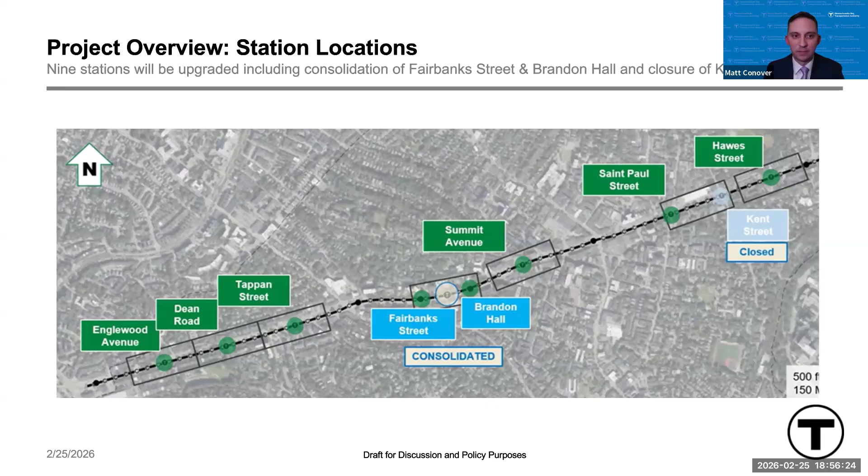For those familiar with the 9 stations, these challenges will be very familiar, but there is a safety and traffic risk. Stations like St. Paul lack physical barriers, forcing people to stand on the curb and into the path of automotive traffic. There's a severe lack of space.

Platforms are narrow; stops like Tappan cannot accommodate strollers or mobility scooters, and they create pinch points and safety hazards. There are accessibility barriers too—steep slopes and uneven surfaces make boarding treacherous, especially in ice and rain, and it's impossible for wheelchairs and walkers to navigate those slopes on the platforms. There are also obstructions: trees and poles block the paths and create physical conflicts with the new Type 10 trains.

There's a lack of wayfinding—poor signage makes it difficult for those on board the train to see what station they're at. There's also a lack of lighting; the stations we're talking about today are only lit by the existing street lights along Beacon Street. Our team has heard from numerous individuals who cannot access the Green Line from stations in front of their own homes due to some of these challenges.

At the completion of this project, the entire C branch will be accessible, and those issues I just talked about will be addressed. Through station consolidation, closures, and platform relocations to ensure accessibility, the MBTA expects to see a 3 to 7% decrease in travel times.

The project will improve wayfinding and add lighting for customers. We've set aside dedicated funding for tree replanting, which will be done under the guidance of the town arborist and result in tree lawns along the Beacon Street corridor.

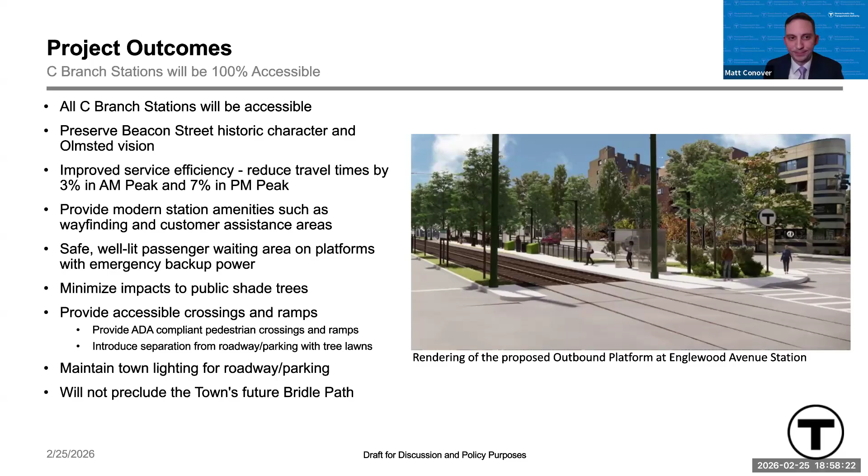This project is a result of several years of collaboration between the MBTA and the town. Through numerous engagement efforts with town residents, elected officials, and stakeholders, we've developed a final plan that provides significant improvements while minimizing negative impacts. The project will ensure a Green Line that is accessible for all and leaves a lasting improvement along the Beacon Street corridor. Now I'll turn it to Gwen Dunlevy, who will provide specific details on each of the stations.

Thank you, Matt. As Matt said, my name is Gwen Dunlevy. I'm the Deputy Chief of Integrated Transit Programs, overseeing the Green Line Transformation Group, which manages a holistic set of projects aimed at modernizing the Green Line, including this one.

I'm sure I'm familiar to some of you. I've been delivering projects along the Green Line, including in Brookline, for the past 6 years for the MBTA, and have presented a number of times about this project, including to this board, over the past few months.

As many of you already know, in order to provide the safe, accessible platforms this community deserves, there will be impacts to the existing infrastructure. We've been hard at work over the past year with the town to minimize these impacts, but some are unavoidable, which we will go over in detail today.

Before we dive into those details, there's a couple of points I'd like to make. First, none of the station upgrades we'll be discussing today result in the removal of any existing pedestrian crossings. Some will be shifted slightly, many will be upgraded, and a few new crossings of the track will be added, but we're not closing any.

The second point is that we won't be removing any accessible parking spaces. Some will shift location a little bit, but there's no change in the quantity at any station. There will be impacts to some parking areas and spaces, but none of those remove any accessible spaces.

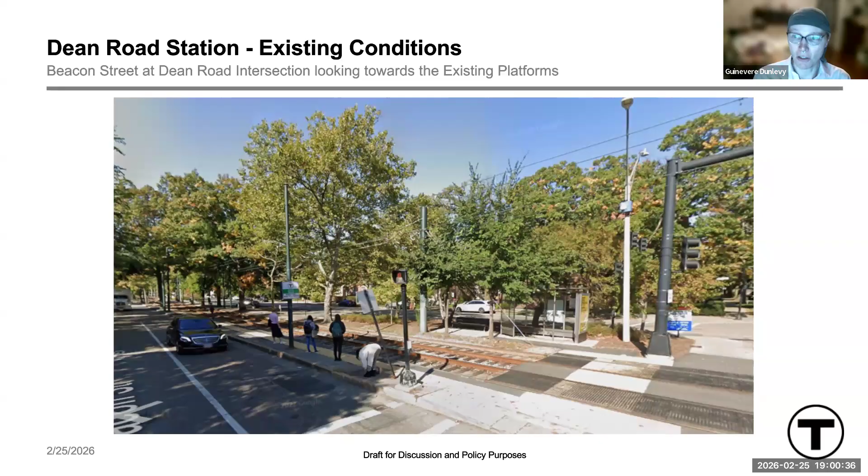Jumping into Dean Road, our first station to look at today, we have a picture of existing conditions. This highlights a lot of the things that Matt mentioned. You can see passengers here and a very thin strip of asphalt between the yellow line—indicating you're too close to the train—and the traffic just a couple feet behind them. Obstructions, narrow platforms, all those things Matt talked about make it hard to utilize the T, and impossible if you have accessibility needs.

Before we review the future layout of Dean Road, I'd like to discuss how we choose platform positions. Impacts to trees, parking, travel lanes, and the efficiency of travel are all factors that we consider and worked hard to reduce with the town. But at its core, this project is an accessibility project.

One of the primary parts of making an accessible station is having accessible paths of travel to reach and utilize that station. A big part of this is related to the slope of those paths. There are maximum slopes as part of ADA requirements, and in some locations, including at Dean Road, the location we can place the platform is controlled by the slopes in that area.

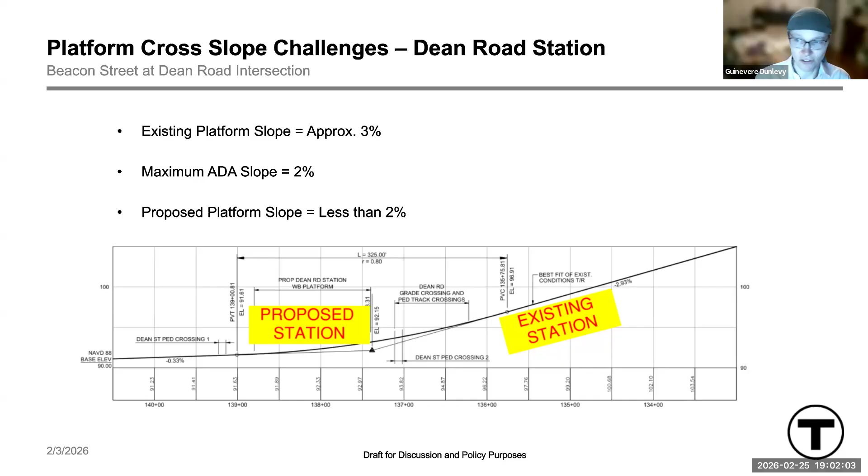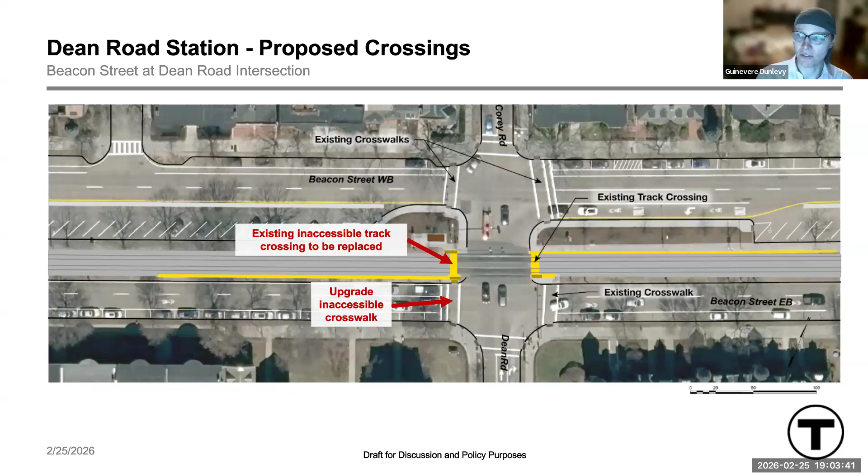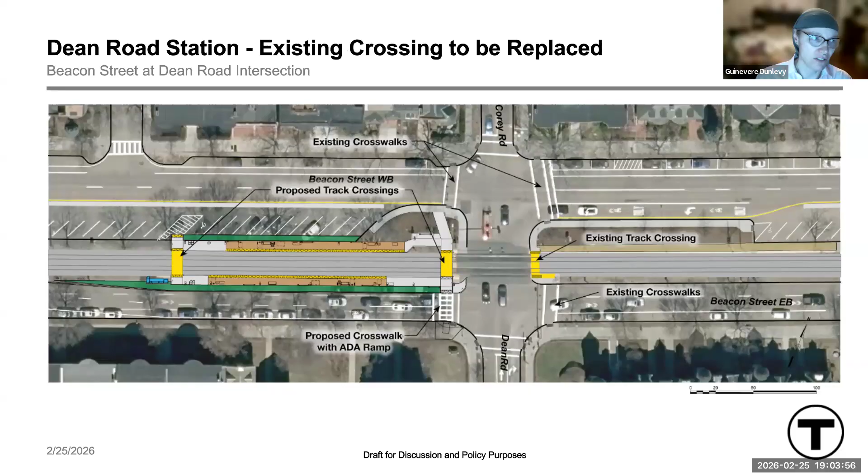Next, we can look at our proposed crossings. Here we show the crossings that exist today and highlight the crossings that will be upgraded as part of this project. Those are the ones to the west of Dean Road, including the pedestrian crossing on Beacon Street eastbound. In our final condition, those will be upgraded, as well as an additional track crossing added to the west end of the new platform. All existing crossings will be maintained.

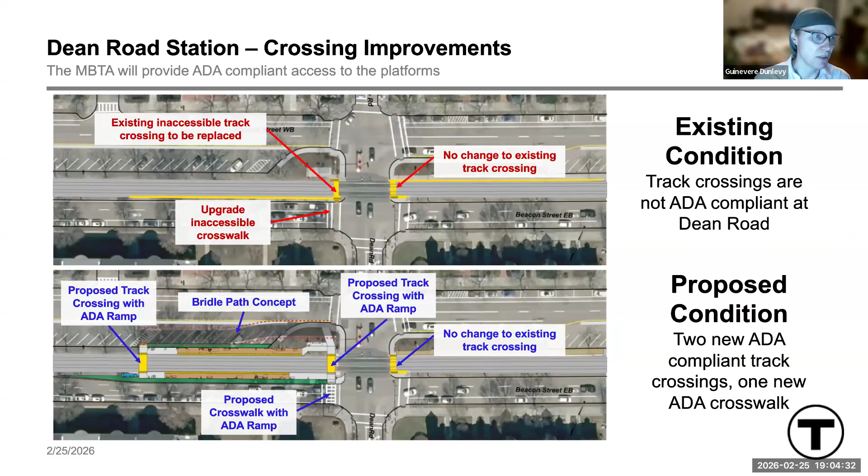Again, highlighting the before and after, the two existing track crossings and all pedestrian crossings are maintained the same, but the crossings that enter the new platform or cross the tracks at the new platform are upgraded. We also show the future bridle path. This project is not working on the bridle path, but we want to demonstrate, as this was a big part of our coordination, that we're being careful not to install any new infrastructure that will be in the future path of the bridle path. We don't want to preclude the building of that by building things in the way that would have to be moved in the next few years when that project moves forward.

Our next station is Fairbanks Brandon Hall Consolidated Station.

Here we have our existing conditions. This location is a bit different than many of the others. We don't have the issue of it being right up against traffic, but we have a steep wooded slope just to the north side of the tracks. Platforms are very similar to all the rest, with that thin strip of asphalt, with the obstructions, the slopes, and the poor lighting that we have at many other stations. This is another station that similarly needs all those same upgrades.

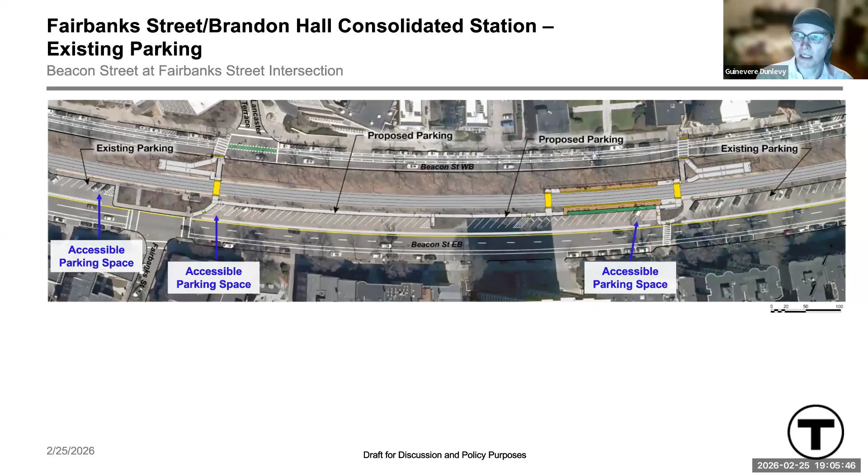Looking at our top-down view of the existing condition, we show a couple of spaces that will be removed for safe means of egress from the platforms, and highlight where those accessible parking spaces are. Moving to the future condition, we can highlight that those accessible spaces are staying the same, and the angled parking spaces will be respaced and end up a little differently.

Now, again, this is a little misleading. Our previous slide showed we're removing two spaces for those safe means of exit from the platforms and the walkway. But reconfiguring the spaces, spacing them out evenly, actually leads to 2 additional parking spaces than what are there today. So you end up with more parking spaces when we're done than we were when we started.

The team worked diligently with the town to explore many different locations and configurations for these ramps, dozens of different configurations to the left of the stairs, to the right of the stairs, up top of the slope, to the bottom of the slope. Slope walkways versus ramps, different foundation types. There was a lot of work and a lot of different options explored here to try to find ones that would minimize the impacts to the slope.

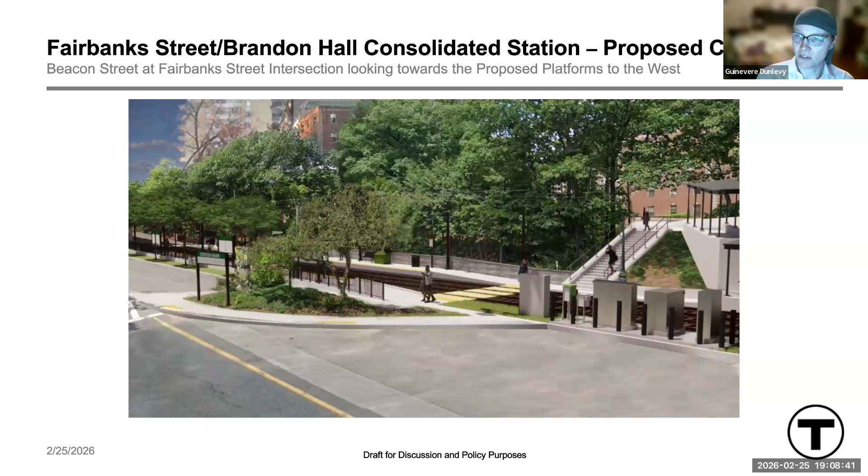Here we have a rendering of the future Fairbanks Brandon Hall Consolidated Station, showing some of the amenities. You can see in the right corner the ramp down that will be installed, the fence at the back of the platform, new signage, benches, trash cans, lighting, arrival signs — all of the great new items that we'll be putting at these stations.

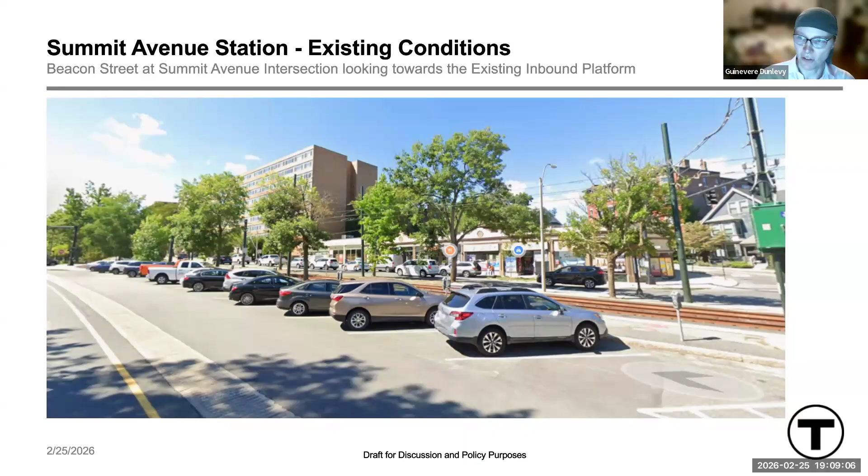Our next station we're going to discuss is Summit. This is very similar to a lot of the other stations along this corridor, with narrow platforms, obstructions, missing lighting, mostly relying on city street lighting to light the platforms, as we see at these other stations. Looking at the existing conditions, we highlight the 1 accessible parking space in this area and the existing angled parking, as well as the current platform locations.

They are significantly longer than they need to be for the trains that we run, so we will be updating that as well. In the final condition, we will be maintaining that accessible parking space. We aren't removing any parking here. When we get to the next slide, we'll show that we're actually adding a parking space here as well. And we are locating the platform just west of Summit Ave, between Summit and Marion Street.

This is a design that we've worked with the town to create to limit both the impacts to parking, meaning there are no impacts here, but also to the travel lanes. This is a busy intersection and a busy area, so we don't want to impact any of these lanes or prevent their use.

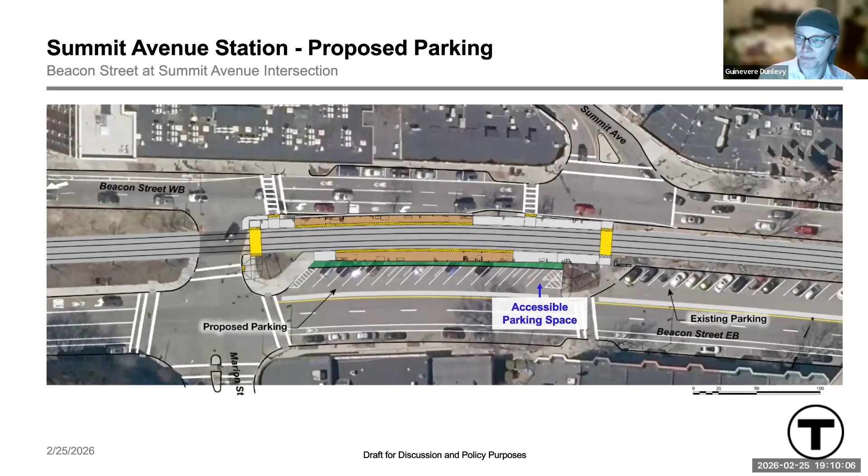Looking at the before and after for parking, we highlight that the accessible parking space will stay in the same area, but due to some shifts in the existing parking spaces — realigning them — they shift out a little bit to make room for the widened platform and tree lawn. This does net enough space to fit 1 more parking space than is currently there.

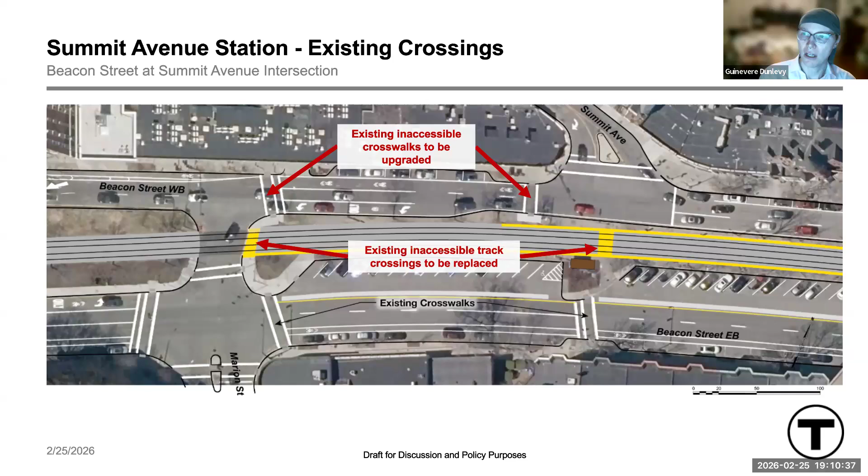Looking at our crossings, we have 4 inaccessible crossings that we're highlighting here: 2 track crossings and 2 crossings on Beacon Street westbound. All 4 of these will be upgraded with this project. No new crossings, no crossings coming away, but these 4 will be upgraded through the work we're going to be doing here.

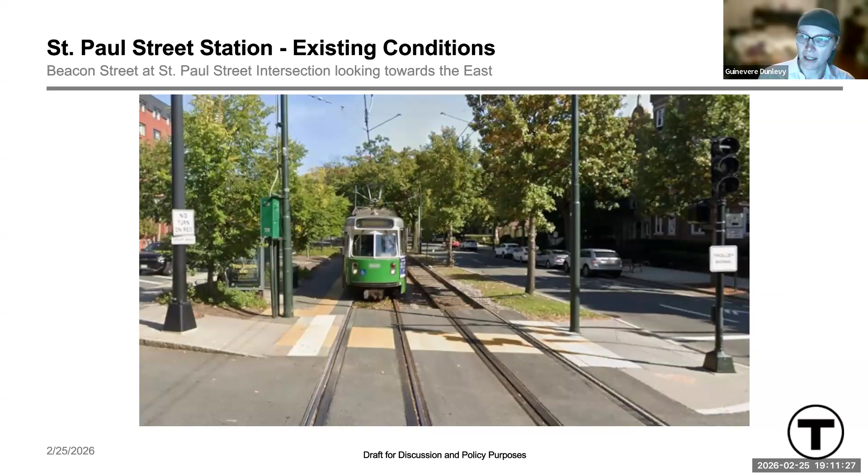Our next station that we're going to look into is St. Paul. Here we have a view looking east. We can show the outbound platform on the left, that same narrow platform with obstructions in the way and uneven surfaces that we see at all of these platforms.

As I mentioned earlier, this is one of the locations constrained by the slopes in the area, the opposite of what we talked about before. Here, the slope to the west is greater than to the east, so both platforms must be moved east of St. Paul Street to get those accessible slopes.

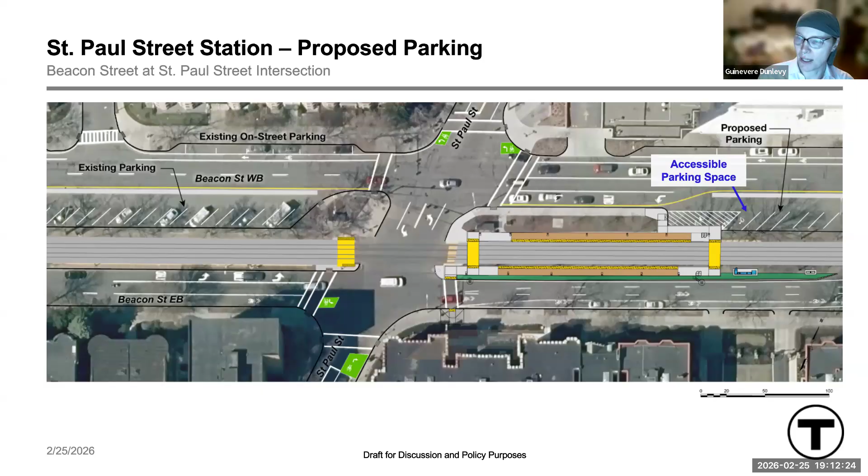Here we have the final condition with the accessible parking space shifted and the travel lane shifted into the parking lane to allow us to maintain those two travel lanes.

Looking at the before and after in this location, a total of 4 angled parking spaces will be removed with this shift, as well as 7 parallel on-street parking spaces that need to be removed to make room for that wider platform.

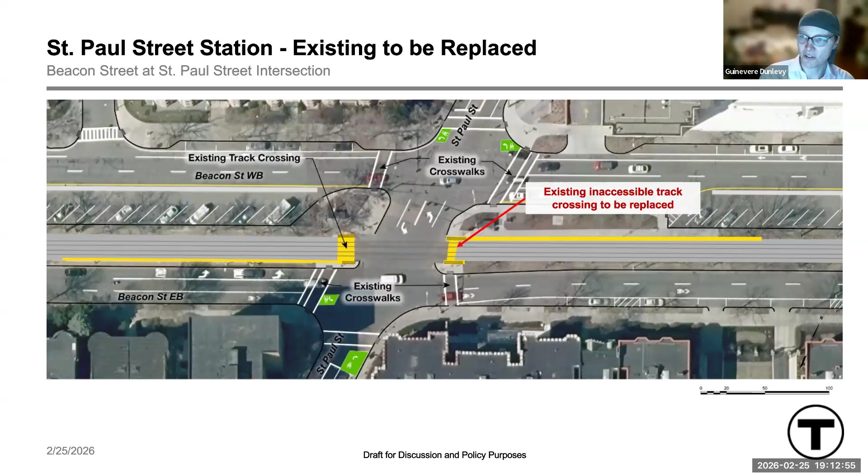Moving on to the existing crossings, we have an existing inaccessible crossing that is going to be upgraded, with existing crosswalks highlighted here at the track crossings. With this new station, there will be 2 track crossings upgraded, an existing crosswalk that will be upgraded, and an additional track crossing to the far east of the new platform location, giving us those 2 means of egress from the platforms.

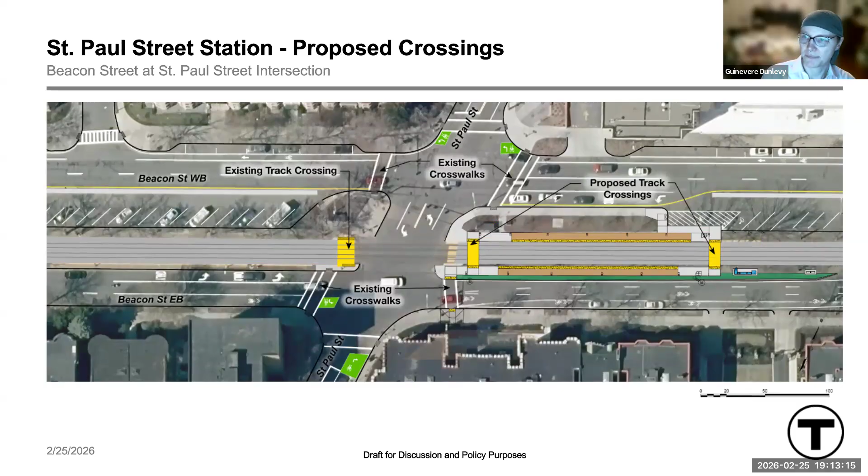Looking at our before and after, we show that we will be maintaining the existing track crossing west of St. Paul Street as a way to cross the street, but that will no longer be used to access either of the platforms. The platforms will be accessed on the east of St. Paul Street, where both are located, with an upgraded accessible crossing and a new track crossing.

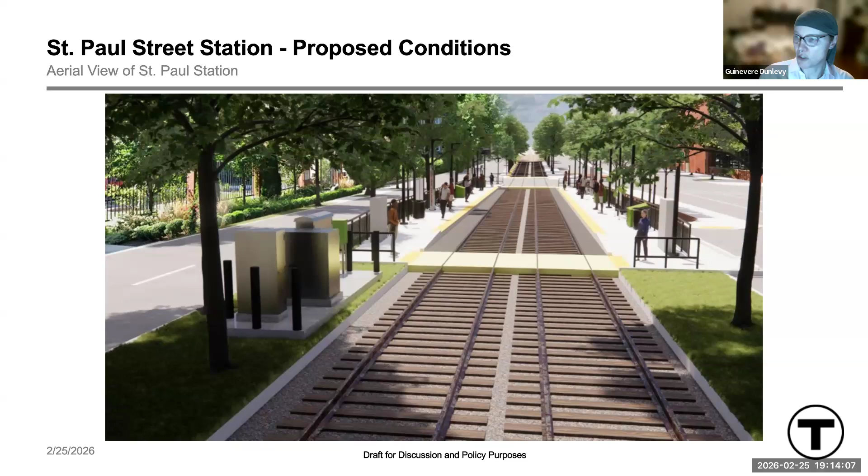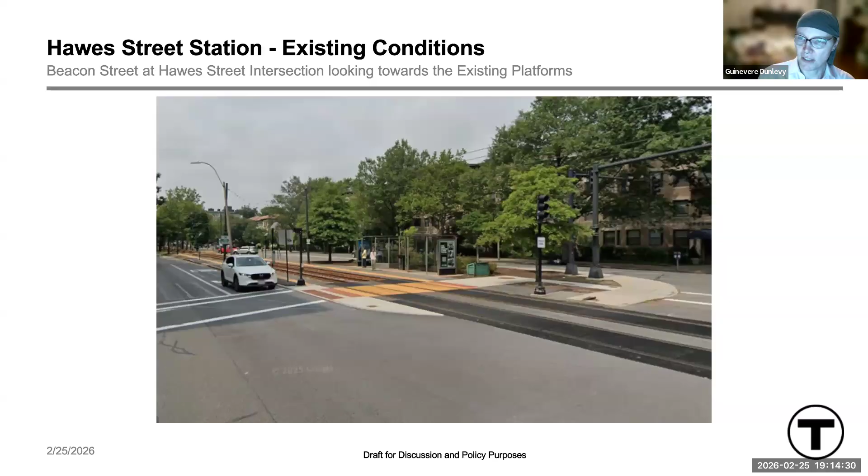Now here we have a situation mentioned earlier, that U-turn lane. For any of these platforms to become accessible, they need to become wider. An accessible path and accessible platform require more than what's currently there, which is only a couple feet wide, not enough to make an accessible path of travel.

Widening that requires us, in most of these locations, to take a lane. Usually we do that with one of the parking lanes, as that is often easier to give up than a travel lane. But here there is no parking lane, just 3 travel lanes. So to make the extra width needed for that accessible path and platform, the leftmost lane, currently the U-turn lane, needs to be removed.

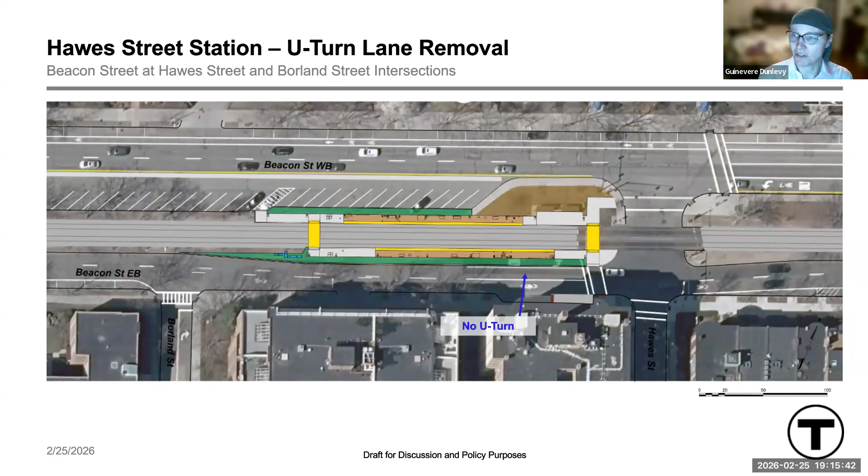Here is a depiction of the future platform. The layout is very similar to today, just with wider accessible walkways and platforms. Once we remove one of those lanes, about half will go to platform or walkway width. The other half, instead of repaving it with no specific use, the town has asked us to install a tree lawn there to use up the remaining few feet that would typically be part of that lane.

Looking at the other option that was originally explored for this location: moving the platform east of Hawes Street. This had some significant impacts that the town asked us to look at alternatives, which is what led to the design that we have moved forward.

One of our older designs originally proposed for this project preliminarily involved putting that platform east of Hawes Street. This had some pretty significant impacts, including 8 on-street parking spaces that, from talking to the town, had over roughly 90% utilization during peak times, as well as a heritage oak tree, 31-inch diameter, making it one of the largest trees that would have been impacted by this project.

Working with the town at their request, we progressed that alternate design, which is the one we have been working with, that has both platforms west of Hawes Street like it is today, to mitigate those impacts.

Now, with the removal of that U-turn, there are some options we worked with the town to look at. These two are available if you've already reached Hawes Street when you realize you need to take a U-turn. One is to take a right on Carlton and circle around through Monmouth and Hawes. Another is to go down to Park Drive, a few blocks down, and make a U-turn there.

Two other possible options for people driving down this corridor trying to make a U-turn would be to take a left on St. Paul Street or a right onto Kent Street to circle around to Hawes. All of these options are less than a half mile detour, and depending on traffic, at least at low traffic times, would only add about 1 to 3 minutes to travel time.

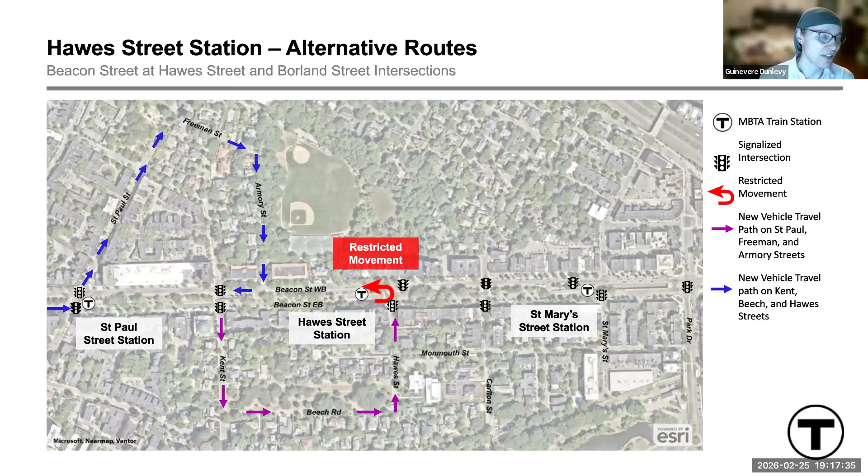Using these as different metrics that we've explored with the town for determining the best place to locate this platform: the measured low turning counts—this is actually the lowest turning count intersection along Beacon Street, less than 50 cars an hour at peak—the need to retain those parking spaces, the desire to reduce impacts to trees, specifically that very old heritage oak, and the available alternate circulation methods, led the town to ask us to explore and move forward with the design to where we are today, keeping both platforms west of Hawes Street.

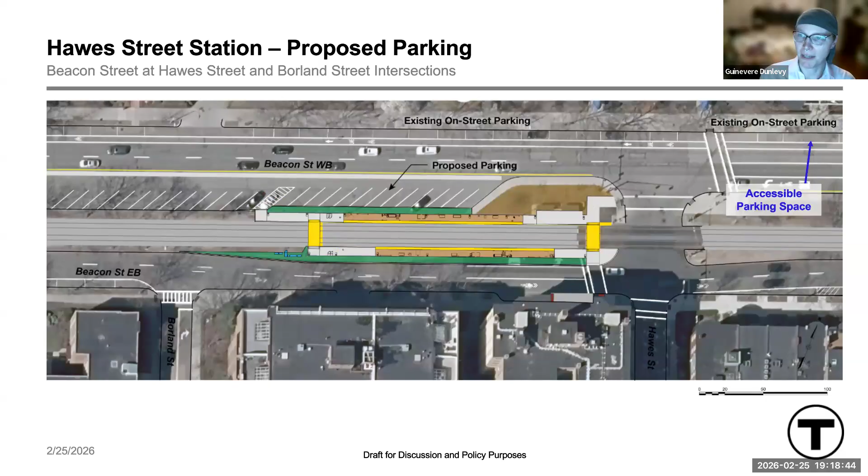Looking at the parking as it is, the only accessible parking in this area is an on-street space on Beacon Street westbound, which will not be impacted by the project. There is one space we will need to impact in creating the accessible exits from the platform. We show here again that proposed platform and the parking space that will be impacted. Looking at the before and after, we lose that one angled parking space, but there are no other parking impacts for this station.

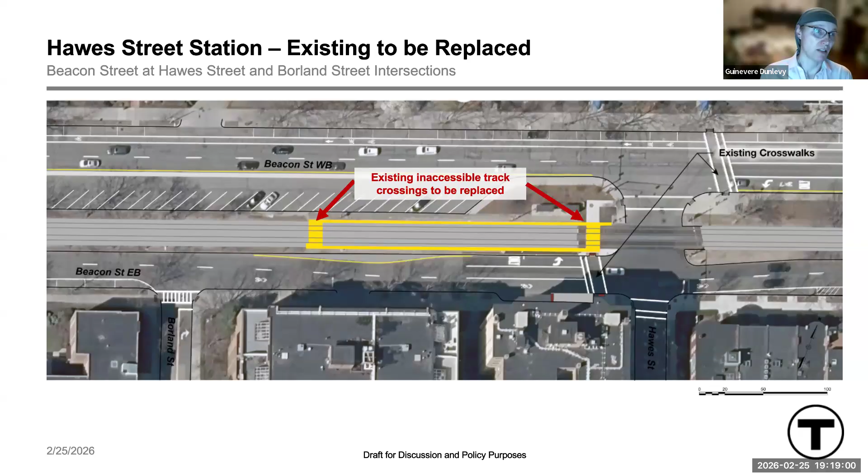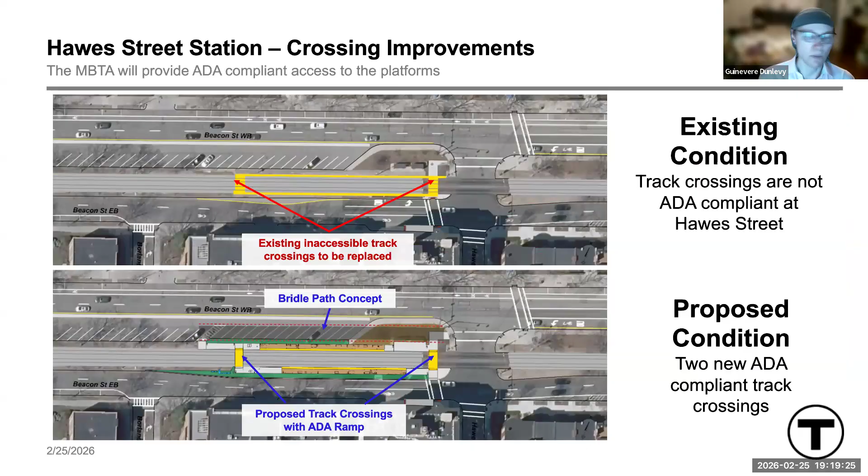Looking at the existing crossings, this station is going to remain in the same place that it is now, so there won't be any new crossings here, but the two existing crossings will be upgraded as part of this project, on both the west and east side of the station. Looking at the before and after, we highlight those two upgraded crossings, as well as the bridle path along Beacon Street westbound, making sure we are not putting anything new in that path for the future project.

Looking at the overall impacts to parking for the project as a whole, it'll be a total overall loss of 22 spaces. These are almost entirely parallel spaces where we need to widen those platforms at St. Paul and Dean Road. When it comes to the angled parking spaces, I think we are basically at a net neutral—there are a couple stations that get additional parking spaces, and a couple that lose one space—resulting in a total of 22 spaces impacted by these 5 stations.

I want to thank you all for listening to my spiel about this project and appreciate your time here today. If there are any questions, we are happy to answer.

Thank you, Gwen, and thank you, Matt. I appreciate it. So folks, put your hands down—we're not quite there yet. We'll get there, I promise you, we will get there.

I want to do a little contextualizing, but before that, I just want to recognize a couple of folks who are here. I want to thank Desiree Patrice, and I want to thank my former colleague, Laura Brailsford, who is a superstar in this field.

I want to thank what is likely a very tired Sam Zhao from the MBTA, who has probably been shoveling snow personally for the past 3 days. And I also want to recognize Commissioner Shute and thank her for everything that she and her team have done to get the town back on its feet. It's very much appreciated that you all do great work. As someone who very tangentially did snow and ice, I recognize the effort, and I just wanted to recognize you for that.

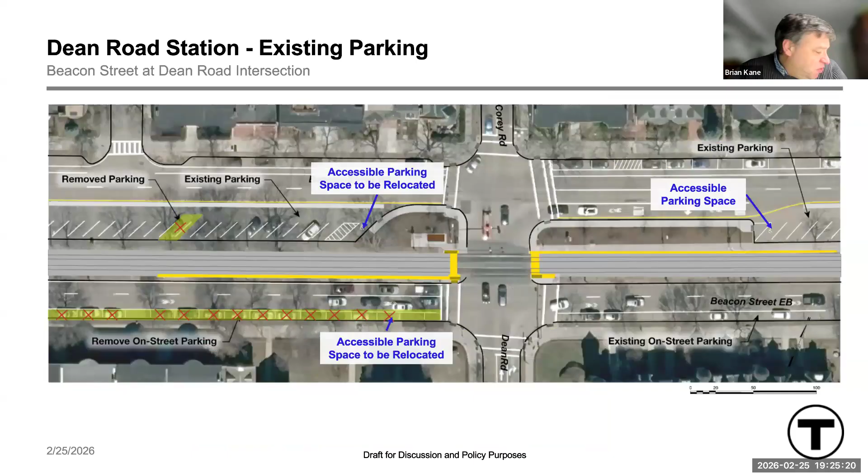Ms. Dunlevy, if you don't mind, could you throw the presentation back up, and let's go to Dean. At this point, I just want to note the proposal for Dean is, as you can see, the reconfiguration of the angled parking spaces and the removal of the parallel spaces in front of the church on Dean and Beacon, as well as new crosswalks. Some of you might remember, we heard an impassioned public comment 2 years ago from a woman who had to cross the street with a stroller every day to get her kids to daycare. She talked about how challenging that was because of the narrow platform. So while this is an accessibility project, it has so many more benefits. With that said, do any of my colleagues on the Transportation Board have any questions, comments, or ideas with respect to the proposals for Dean Road Station?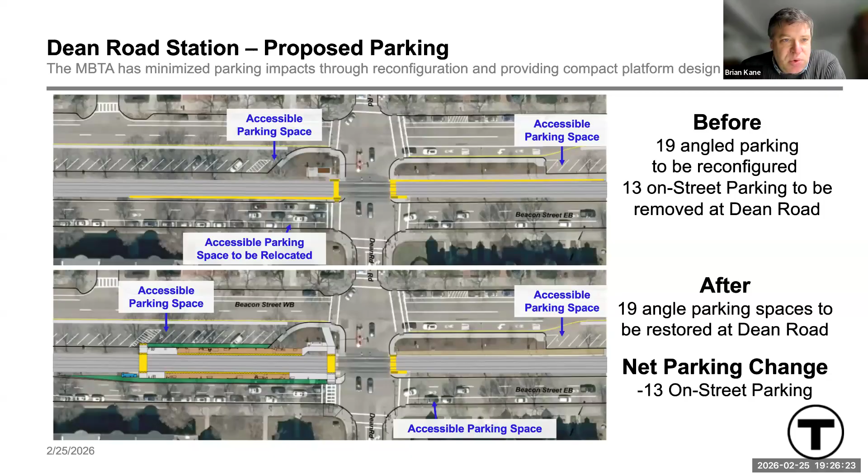If anybody would like to comment on the proposed changes to the Dean Road Station, please raise your hand. Okay, at this point I think we're good on Dean Road. We're ready to take a vote on that when we get to that point.

Ms. Dunleavy, can we please go to Fairbanks and Brandon Hall? I think everyone is aware of what's being proposed here: reconfiguring the angled parking, with a net change of 2 angled spaces. We also will be...

Let's see if anybody has any questions. Anybody have any questions? Len? Yeah, I have a question.

With the senior housing being at 1550 Beacon Street, was there a possibility to have the pickup and drop-off platform closer to that on-ramp instead of where it is proposed here, closer to Brandon Hall?

Unfortunately, no. This is one of the stations where the track geometry is kind of controlling where this platform has to be. It is a little steeper closer to Fairbanks, and there's also more of a curve to the track, both of which make it very difficult to make an accessible platform. That forces us to be closer to Brandon Hall.

We did put it as close to Fairbanks as we could, pulling it all the way to the west end of the Brandon Hall access point. This was the location we found that was closest and also has the lowest impacts. I know we're not talking about trees today, but considering the trees and various things over there, this is the most middle we could get it and still make it accessible. Thank you.

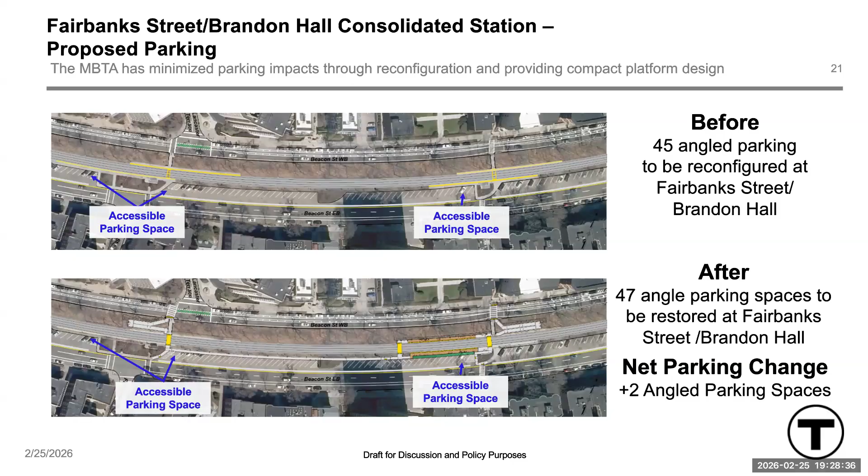For a number of years, I've been concerned about the westbound crossing on Brookline at Beacon, at the top of the stairs at Brandon Hall. I've been told by a number of people, including the commissioner, that it would be fixed when this T reconfiguration was done.

Can you address that either now or at some later time, to make sure that crossing is safer? Right now it is a terrible hazard to cross Beacon Street in the westbound direction coming up the stairs from Brandon Hall. Thank you.

Anybody from the T or the town want to take that one? Yes, we are doing that as part of this project. Specifically, we will be widening that crosswalk, making sure all the slopes and detectable warning panels are accessible. Both at Fairbanks and Brandon Hall that will be happening, as well as adding accessible ramps down that slope to get to the eastbound side of Beacon Street where the tracks are and the station will be.

Well, I wasn't talking about the access, I was talking about crossing Beacon Street. Yes, right. And maybe that's not a T responsibility, but a town responsibility.

So, Mr. Maranzano, let me take a shot here. First of all, you're 100% correct, there's been a challenge at that crossing for years. One of the issues that came up very early in this process was a lack of understanding as to who was responsible for what, especially with respect to the crosswalk you're referencing, as well as the flashing light that I believe is there.

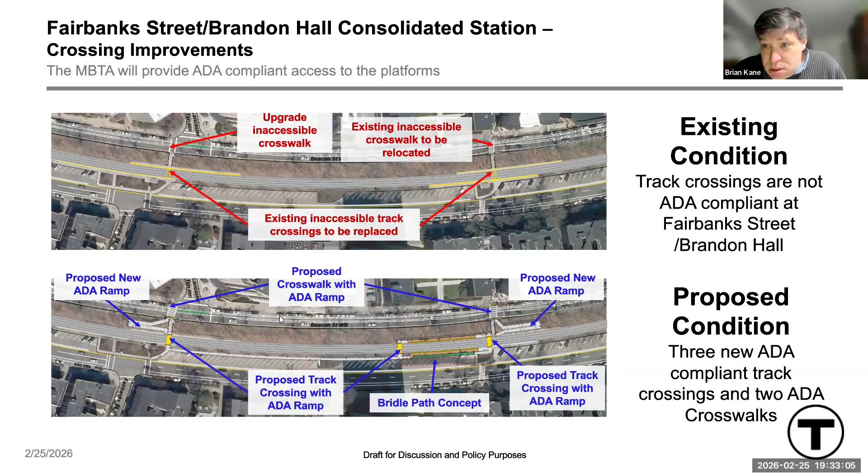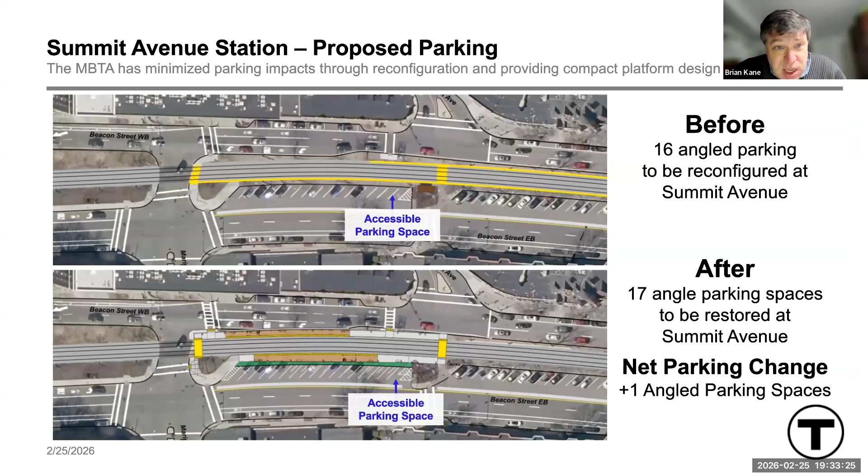Okay, Summit. So what we're looking at here is reconfiguring 16 angled spots to result in 17. Is there a crosswalk here too, I believe? Yes, 2 new crosswalks. Those are track crossings. Existing inaccessible crosswalks to be upgraded on Beacon Street at Summit. So there are 2 inaccessible crosswalks that will be brought up to modern standards and made accessible with ramps, which is huge.

Anybody on the board have any questions or comments on this particular proposal? Richard, go ahead please. It's on the left-hand turn lane. I know we didn't have a rendition of what this station looks like from street level, but it seems we're not having a greenscape along the westbound side. Just looking to see what the rationale was on that, where it's not having that design there, and it seems to be adjusting to the fact of the left-hand turn lane that exists.

You got it exactly right, Richard. In this location, there is enough space in the street width to widen the platform and make it accessible, but not enough space to add that green area without taking that left-hand turn lane. It's a pretty heavily used left-hand turn lane, and it did not make sense to remove that to add the green space at this location. But the green space will be added on the south side, closer to Beacon Street eastbound, and where the old platform is being removed, there will be some additional green space as well.

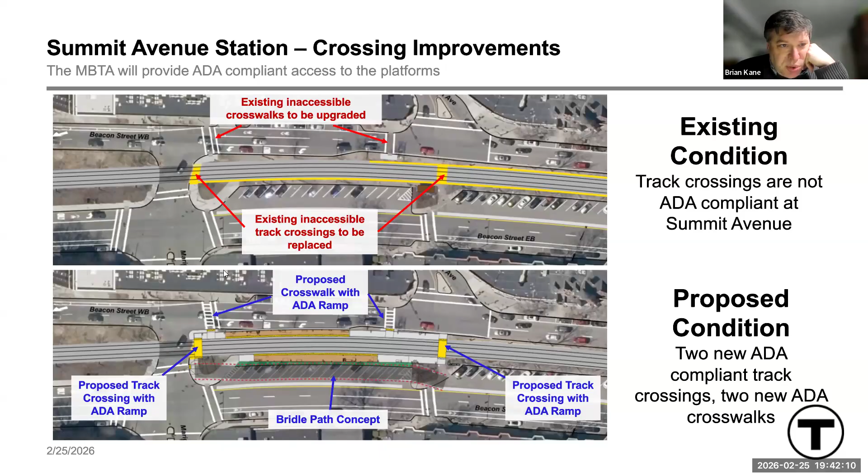Questions on this station? I should point out that this is a great example of compromises we've made. For instance, I would love to see far side stops on all of these, but for a variety of reasons, to mitigate parking loss, tree loss, and other challenges, we are compromised, which is less beneficial for transit users but probably better for all of us who share this town. So this whole thing is a series of trade-offs, and here we are.

Jonathan: Just because I happen to ride this particular station a lot, some of these stations, I understand in their current form they are not at the same elevation the new stations will be at, but some of these stations do have some drainage issues. Are those accounted for in the design? I know you'd mentioned drainage in your presentation.

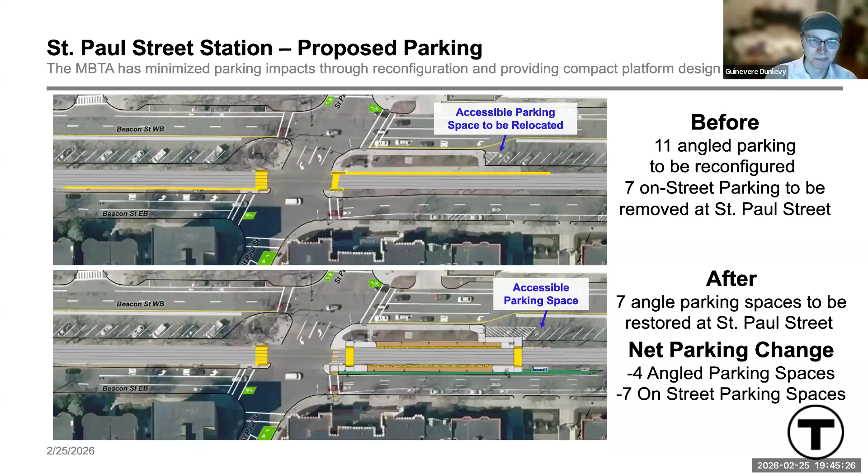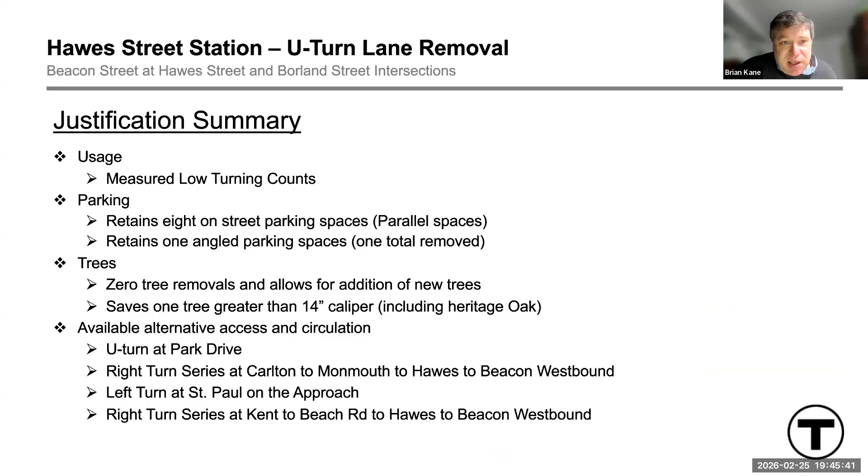Okay, let's just go. Let's do the parking. So the parking is, there's a loss of 1 spot, right? 14 angled spaces to be reconfigured to net 13. And that is the thing with the parking.

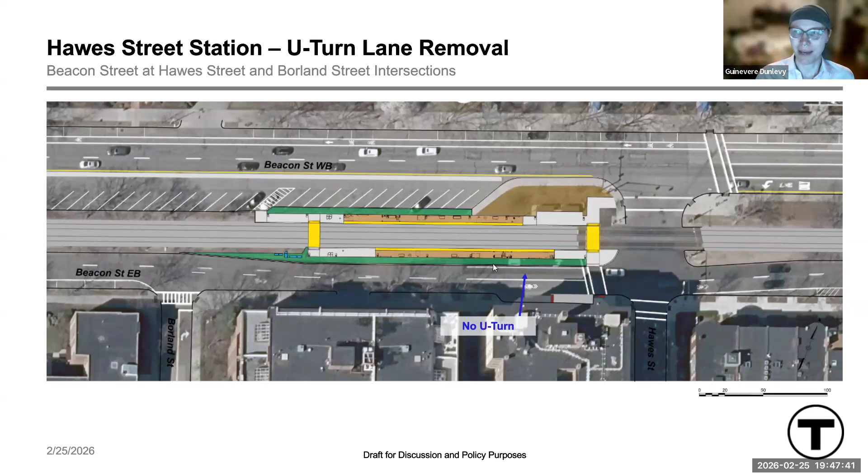Widening the walkway, regardless of if it's at the platform or not, widens it by a few feet. The current Beacon Street width is not wide enough for that widening of the accessible pathway and still maintaining 3 lanes. So even if the platform itself, the tree lawn, all of that is shifted west 50, 75, 100 feet, you would still need to have an accessible pathway to get to that platform, and that accessible pathway would be too wide to fit with 3 lanes adjacent to it.

Currently, right now, curb to the rail edge of the tracks is 7 feet. I noticed the Babcock Comm Ave new station has a platform of 6 feet wide accessibility, and then obviously you have a long path getting to the mid-block platform. What type of width do you need from the edge of the tracks to the street side as far as having an accessible walkway?

I don't know the specific number off the top of my head. Maybe Matt, you can speak. 6 feet 7 inches wide - watch me, I'll get that backwards - 7 feet 6 inches wide. Well, actually, I believe it's 6 feet 7 inches wide that's accessible for a mobility device.

And then we do see down in the curb area where Gwen was just talking about, there is a ramp, and there has to be enough of a slope to get up to the new 8 inches off top of rail. So sometimes that area needs to be a little bit wider to accommodate a mobility device.

Yeah, no, understandable. It's just that I think there's space for the accessible aspect of it. All I'm asking is, can we extend that walkway by pushing the platform west and just make it a longer walkway? No different than probably what we did over on Summit Ave.

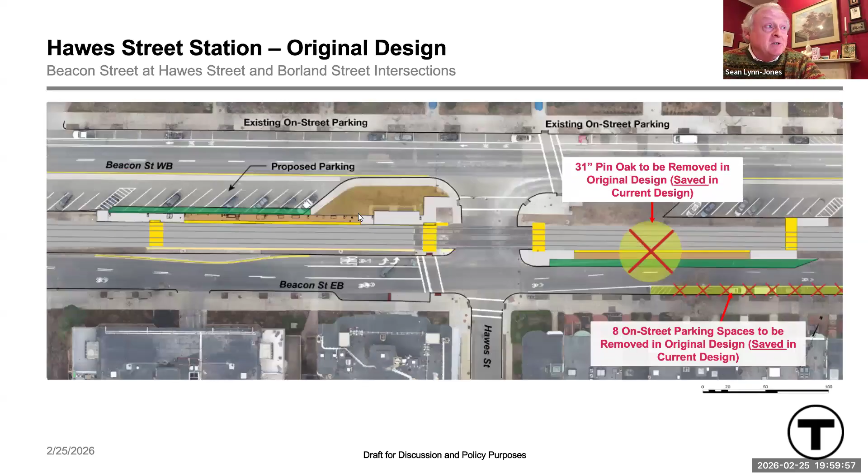Slide 49 is kind of weird in that it indicates a U-turn route that goes up St. Paul, across Freeman, back down Amory. If you really wanted to make a U-turn, you would just do it at St. Paul, because there's a protected left turn and dedicated exclusive lane for making that turn. Some people don't like that intersection, but it's the quickest way to reverse your direction on Beacon Street. What that blue route is on slide 49 is one way of getting from inbound Beacon Street to that Western Cottage Farm area without going to Hawes Street and doubling back.

Whether it's a good way or not, people will debate, but that's what that's good for. There's also a route, somewhat similar, that Kate Silbaugh pointed out to me, and she said she doesn't like it, but she thinks it's better: do the U-turn at Charles, take Pleasant up to Freeman, and then come back down. The timing is about the same for these two, but I'm just pointing that out because it's kind of misleading to say that's a good U-turn option, because it's actually good for something else.

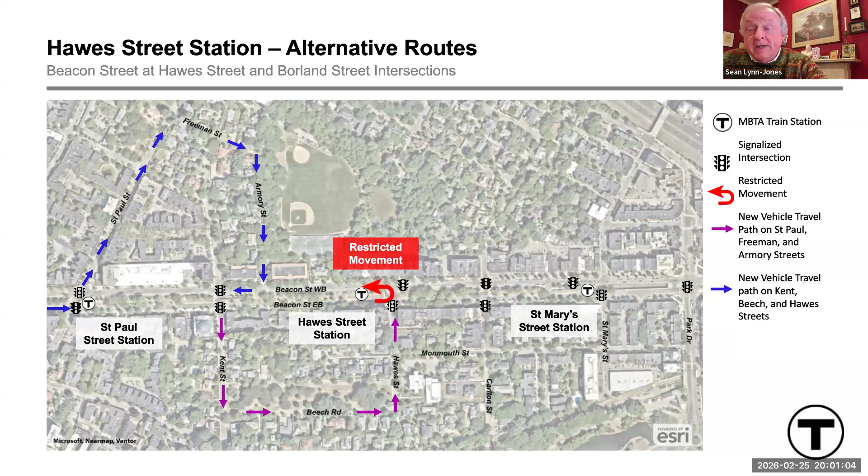I think the left turn could be maintained without the exclusive lane, either by making the left travel lane an exclusive left turn lane, or having it be a turn lane where you can take the left turn when there's a green arrow, but it's also for through traffic otherwise. I know there are different arguments from a traffic standpoint for each, but two things are relatively clear: not that many people are making a left based on the counts I've seen—40, maybe 50, maybe 25 for different estimates from staff and from a VHB study, but that's the peak hour estimate per hour.

So it's not that many, and I don't think it's going to be an insurmountable problem there. One through travel lane, either de facto or actual, depending on whether you make that an exclusive left turn lane or not, may be enough for the capacity there. There are some other interesting options I've been talking to people about: not having such a long left turn lane with lower capacity, since it doesn't get that much use, shifting it a little bit to the east, extending into what's now the intersection and the grade crossing. But I think those would probably have trouble with the requirement for the walkway to be a certain width for ADA compliance, because you'd still keep the crosswalk in front of the U-turn. But that's just something else to think about.

And if you really can't do this at Hawes, consider other places like Kent or Carlton, but Hawes is really the optimal place for this turn, especially since you already have traffic coming out of Hawes Street and turning left, which it will continue to do so unless you ban it or make it one way in the other direction or something. So those are my thoughts, and I hope that this is a circle that can be squared or something like that in a way that satisfies everyone. And I'm glad to hear these ideas coming from the board about keeping the turn this way. Thank you very much for listening.

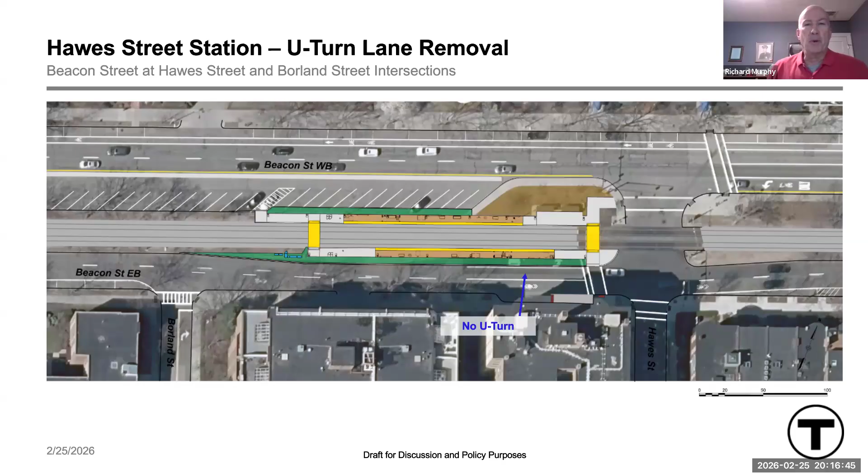Dan, Martin, would it be possible, either I can share my screen, or if you could, I sent you an edited edition of this, just to demonstrate what a picture is worth a thousand words. Sure. I have mine up if you want me to share. Yeah, if you share, that way the right version comes up.

See my screen now? You don't know? No? Gwen, can you take yours down maybe? That's not mine. Yep, we can see yours, Richard. Am I showing the Hawes trolley stop? Yes. Move the mouse around so we can see it. All right, so this is currently what we're looking at on the screen.

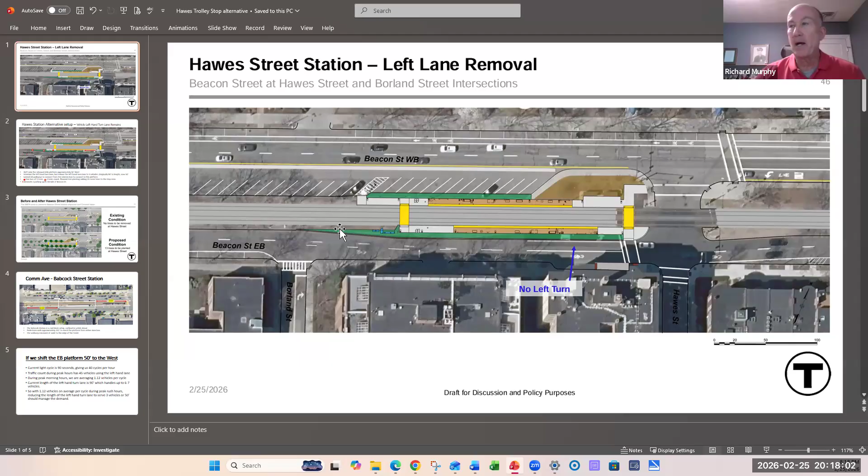So what I was talking about is the eastbound platform, whether it could come to the left or west, by so many feet. I said 50 feet, but here's what I'm thinking: currently the left-hand turn lane is 90 feet, and based on traffic counts, we're averaging 1 to 2 cars taking a left-hand turn each light cycle. A light cycle is 90 seconds, approximately 40 cycles per hour. So even at peak time, if we had the left-hand turn lane at 50 or 60 feet, basically holding 3 cars, and the platform came a little bit west, it would jeopardize what I think is one tree, about 12-inch DBH.

It would move the platform over, and obviously there'd be more technical work with the handicap accessible ramp at the crosswalk that you mentioned, which would have to be adjusted. But this is what I was proposing we possibly look at doing as an alternative.

Appreciate that, thank you. I'll throw in my proposed alternative, which is that we do the T's proposal but don't get rid of the left turn lane. Let folks take a left turn from the left-hand side; they can go through or take a left. So that's my proposal. You have Richard's proposal, and there's also the T's proposal. Let's go to Sean now, I promised we'd hear from you next. Can you please keep it brief?

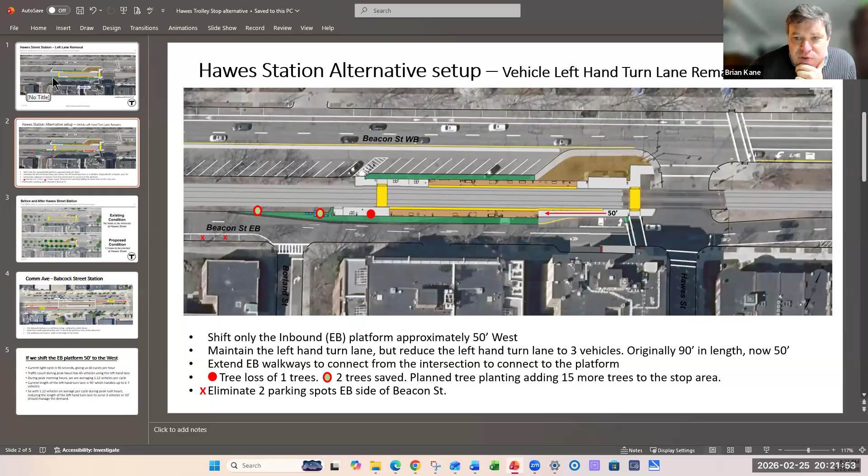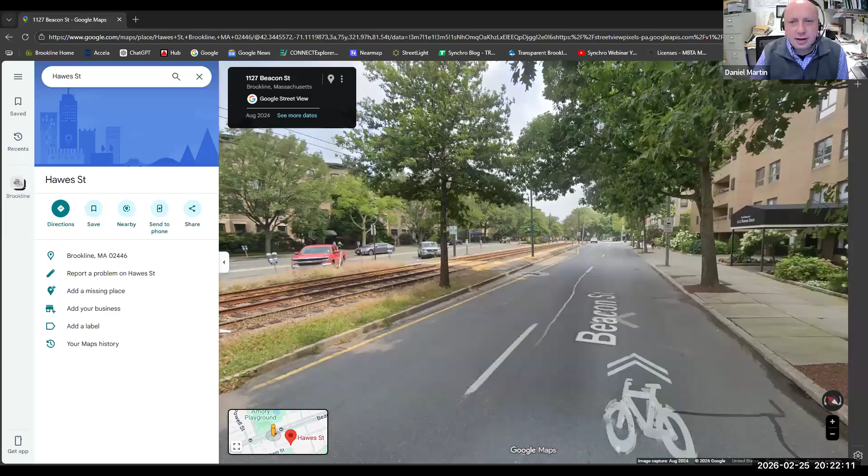Yeah, I think the T and the town did look at what Richard Murphy was proposing, and I think one of the easiest ways to see it is just if you look at the track — it's very narrow. Right now, when you look down this area, you can see this ramp needs to get up to this track crossing, and this is not accessible right here. So that's one of the bigger things. In order to get this space, you need to go out into the travel lane, and there's no room here to expand the curb. There's a tree, there's parking, there's another ramp over here, and the scope of the project is limited to the medians.

So shifting all this over doesn't work with the left turn lane to fit. And then coming down the tracks, there's also obstacles here, so we don't have the 6 feet here that the MBTA is looking for the path to lead in. So that's the narrow part, and there's only 30 feet roughly from curb to curb.

And then I think some of the other options were about the left turn lane being removed but still allowing lefts, or if we can do a left green arrow. If Tim Rustica is able to talk on that — I know he had looked at some of these options the town had asked very early on, and I think there were some limitations on left turn arrows with the signal without a dedicated left turn lane. I don't know if you're able to speak on that, Tim. Are you here? Yeah, can you hear me?

Go ahead. Yeah, I mean, what we had looked at early on, obviously, with keeping that as a left turn lane, there's going to result in some backups in the traffic. And from the signal perspective, I know the MBTA generally prefers protected left turns, so then we're looking at dedicated phases, like Dan was saying, for those. And obviously that's going to have a pretty big impact on the operations there.

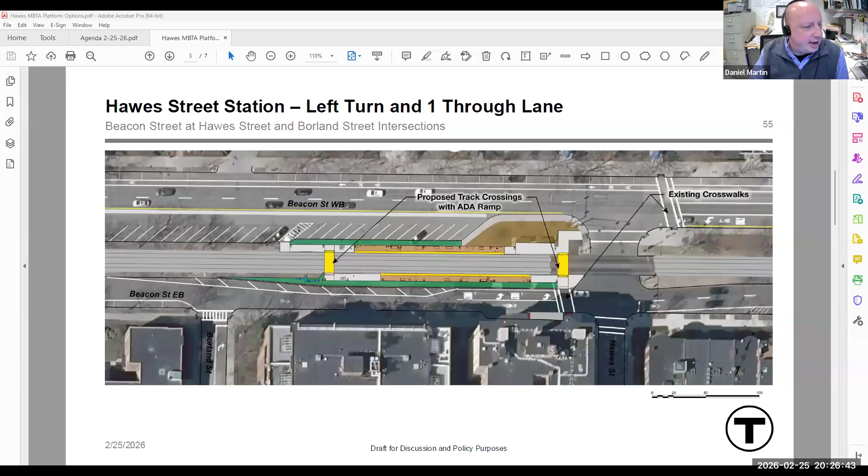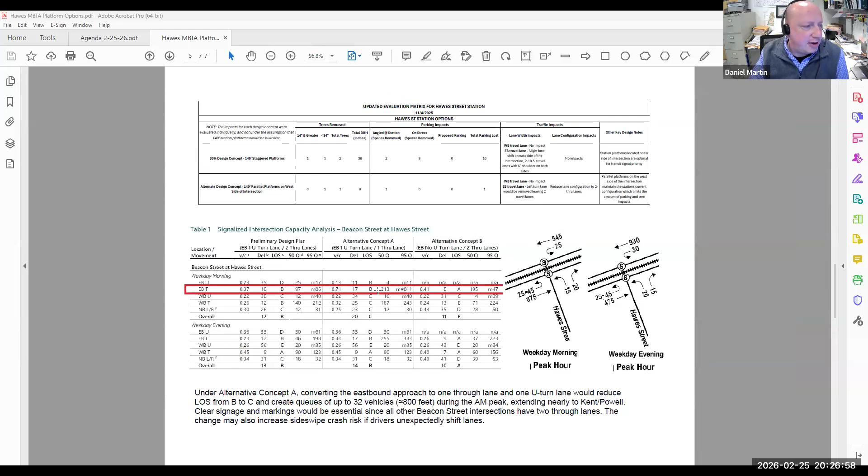Yeah, so we did look at it, and there is some significant queuing that happens. It does show level of service is still a B, so traffic does move through there - it's just a lot longer now.

I'm hearing that this is a very important access point for the neighborhood, so I'm really remiss to take it away. If it means longer queues, as long as nothing's ridiculously unsafe, I think it's worth at least trying, because if we do this, the T can move forward with this project, and then the road configuration becomes our problem, as opposed to holding up this multi-million-dollar accessibility project further.

So I don't know, you're not convincing me, Dan. I hear what you're saying, I respect what you're saying, I don't disagree, but as I said earlier, we're not going to make everybody happy. What's a good compromise? Everyone's a little unhappy - maybe that's what we'll end up with.

Wendy, I see your hand up, go ahead please. So two things: right now there's no left on Kent Street, right? Correct. But since the station's being removed from there, is there room to put in a left turn lane there? It looks like right now the eastbound T is on the westbound side of Kent, is that right?

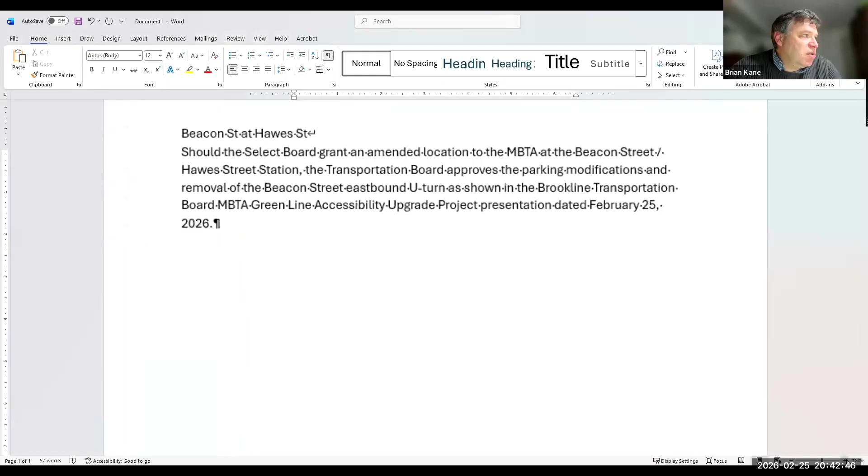I'm going to read it. Should the select board grant an amended location to the MBTA at the Beacon Street / Hawes Street station, the transportation board approves the parking modifications.

I mean, this is the right thing to do because if we cannot come to an agreement otherwise, let's say there is no other viable option, the transportation staff go through MUTCD and flip it upside down and rub a lemon on it and no secret words pop up. Just to be clear.

I believe that has to be a way to do the station. This language that is on the screen is what I believe is on the table right now. Does anyone disagree with that?

No. What this motion does, all it does at Hawes Street is approve the parking removal. It does nothing. It takes no action on the turn. Which means the MBTA's proposal.

That's not what I understood, Jonathan, to be. Me neither. Okay, so that's why we're doing this. Jonathan, maybe before you could add language that we must return before construction to present options for preserving the left turn access. Okay, so Jonathan, it's your motion. Yeah, one of which, Dan, would have to be the no build as well.

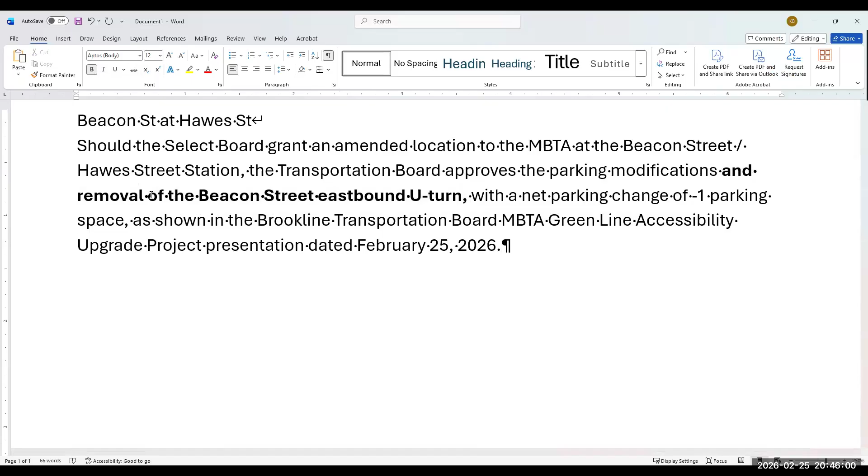Removal of the eastbound U-turn lane. Yeah, that works. Right. And then if you want, we can add language that we will revisit the idea of whether we allow a U-turn there, and instruct the transportation staff to provide options for new cross section of eastbound Beacon Street at Hawes.

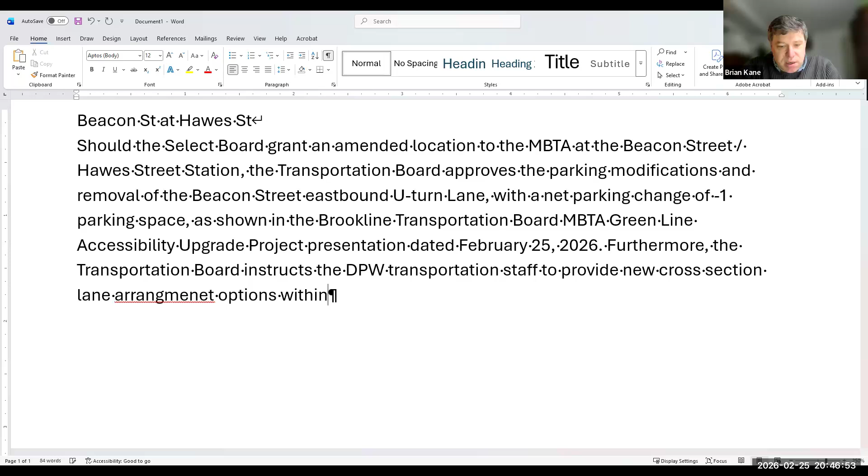This instructs Transportation staff to provide new cross-section or lane arrangement options for eastbound Beacon Street at Hawes, within some timeframe. I'm going to give Dan the option of choosing the days.

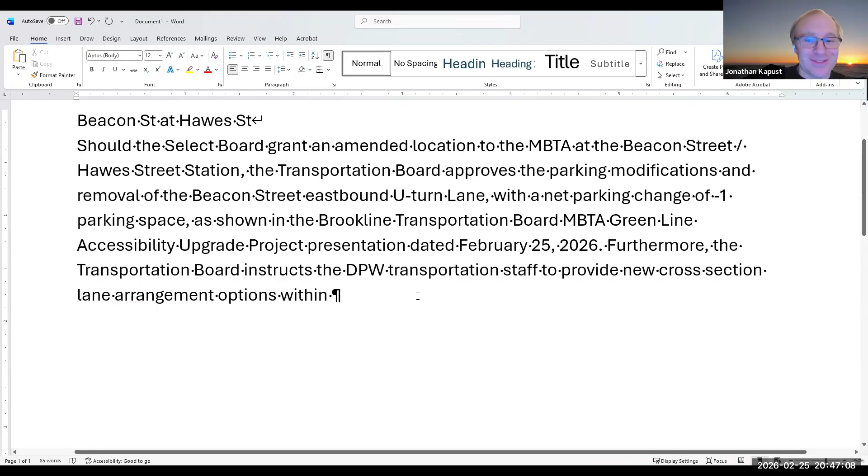Dan Martin suggested that maybe instead of a time limit, we could just set it before construction, before 100% design. That seems reasonable, timing it with the project. I think they might have notice to proceed with design build before project 100% submittal, project completion.

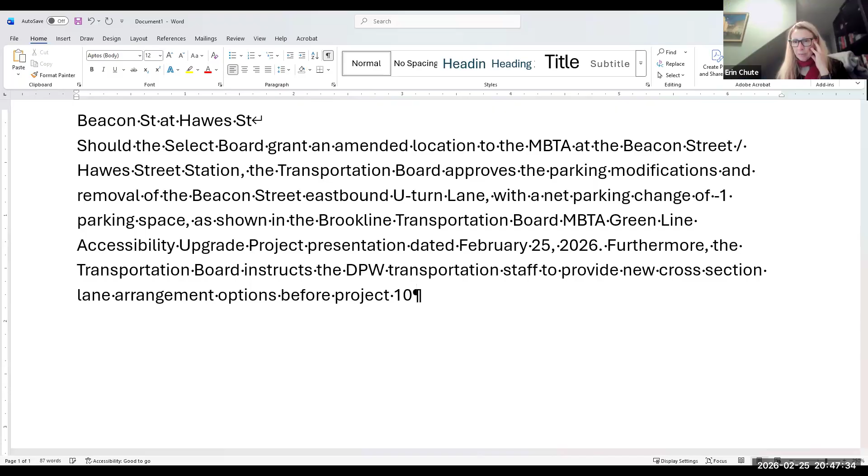Okay, Richard, I see your hand, we'll get to you in one second. Let me read this again: with respect to Beacon Street and Hawes Street, should the Select Board grant an amended location to the MBTA at the Beacon Street/Hawes Street station, the Transportation Board approves the parking modifications and removal of the Beacon Street eastbound U-turn lane with a net parking change of -1 parking spaces as shown in the Brookline Transportation Board MBTA Green Line Accessibility Upgrade Project presentation dated February 25th, 2026. Furthermore, the Transportation Board instructs the DPW Transportation staff to provide new cross-section lane arrangement options before project completion.

For eastbound Beacon Street at Hawes, or for a U-turn solution. One second.

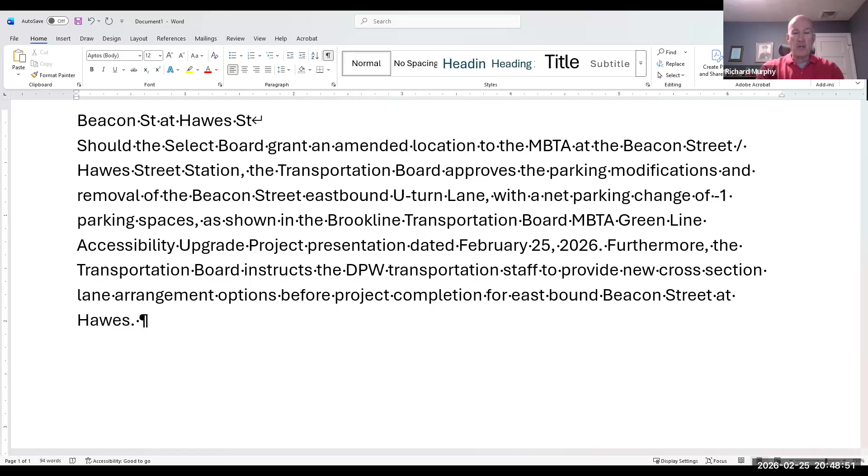Okay, Richard, what would you say? I couldn't hear you. I would say I'd be in favor of voting yes, as the station is, with the intent of creating a U-turn solution for this neighborhood.

It's a very long motion. Something like that? Yeah, you throw an R in U-turn. No one's judging you, Ryan. I think you have to say 'consider.'

We're not voting that there's going to be a U-turn, we're voting that we're going to consider it. I agree, Nancy, but if we end up eliminating it, it's our intent to find a way, though it can't be confirmed at this time. From St. Paul, if you get to the other side of Beacon Street, you have to drive a mile up and down Beacon Street. Richard, we understand, we'll continue this conversation next time.

Thank you, John. Here we are, democracy, ain't it great? We're watching the sausage being made tonight, folks.

Is everybody on the Transportation Board clear on what is being moved? Jonathan, I assume you are still moving this. Okay, so this is moved by Jonathan. Is there a second? Seconded by Nancy. Discussion. Richard, would you like to offer an amendment? As long as we have the intent of a U-turn solution discussed at following meetings before construction. It's certainly my intent to retain a U-turn there if we at all can. Len, how are you doing on this? It's fine with me. Clear? As clear as mud.

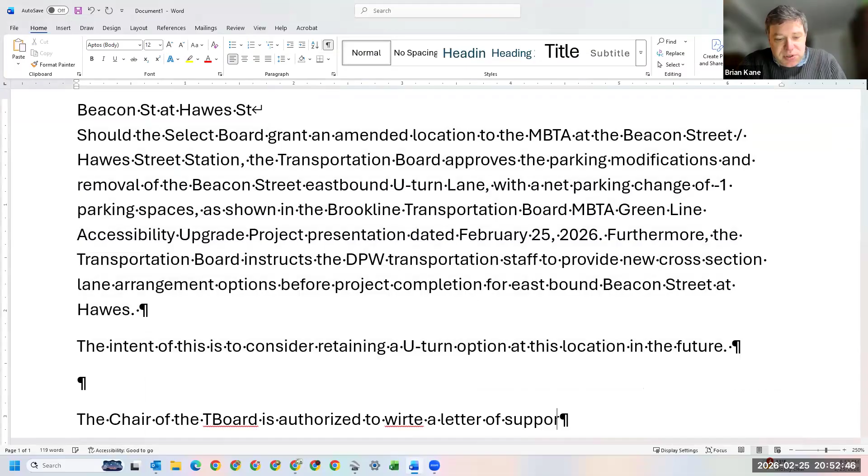The chair of the T-Board is authorized to write a letter of support expressing the T-Board's support for the MBTA's C Branch Accessibility Improvement Project. Something like that.

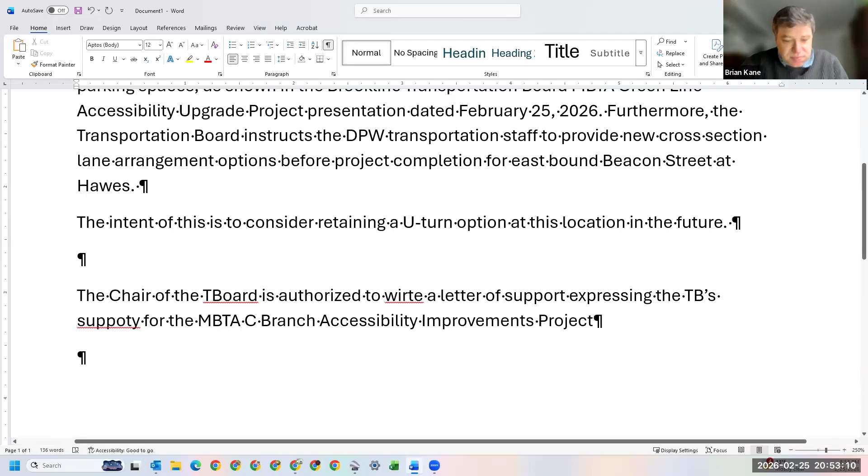Does somebody want to move this? So moved. Is there a second? Second. Dylan, call the roll please. Richard, yes. Len, yes. Wendy, yes. Jonathan, yes. Nancy, yes. And Brian, yes.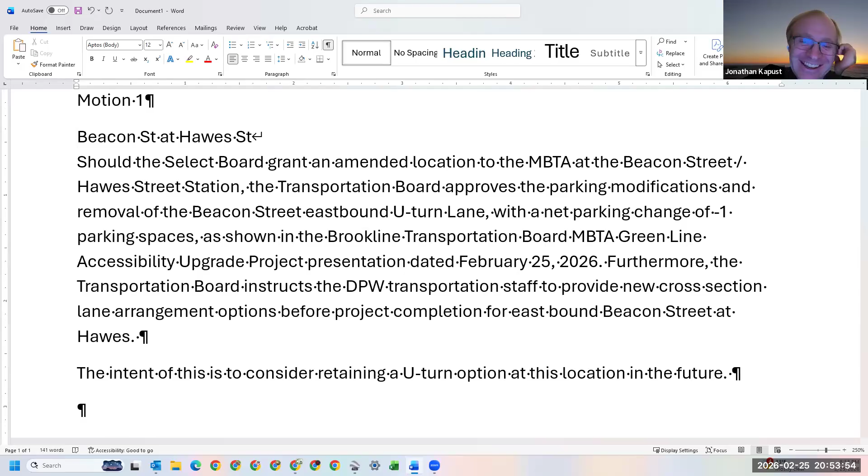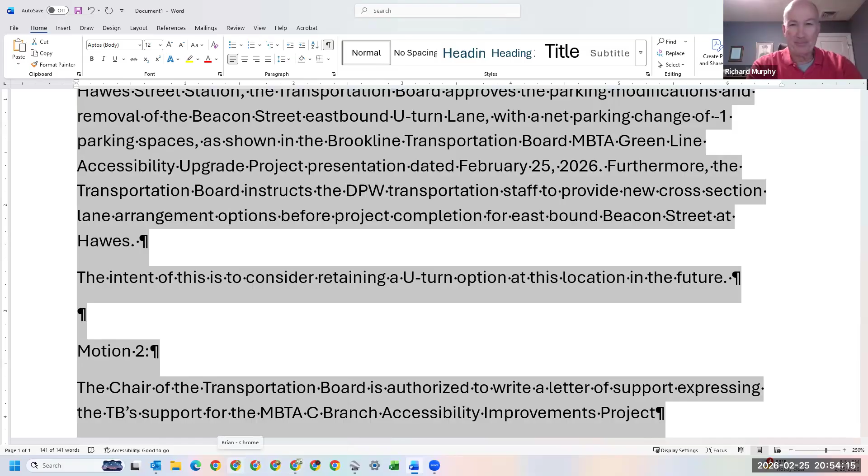Thank you, MBTA. Thank you, Transportation Board. Fun, thank you, I hope we never have to see you - no, I'm joking. It's been fun, folks, thanks. Gwen, you feel the love, right? Absolutely, I would never say I never want to see this committee again. Brian says he looks forward to the ribbon cutting day, and he's buying drinks. Damn straight, we'll see you at that ribbon cutting. Washington Square, he has a watering hole there I think. One or two. All right, thank you.

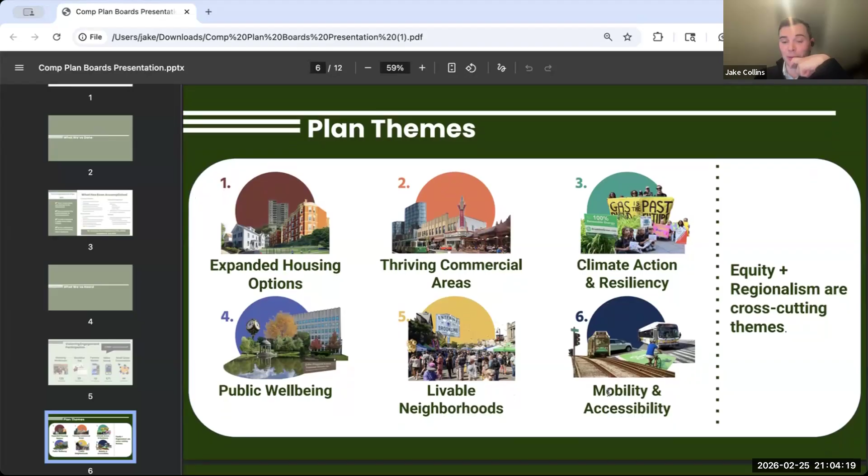So last year, the Comprehensive Plan Steering Committee, of which Richard Murphy is a member, developed these plan themes. As you see, theme number 6, which will eventually be its own standalone chapter that'll be cross-listed in probably all these areas, is mobility and accessibility. So there is a big component of the plan, and I expect that we will need to hear from you at least once, and probably a couple times throughout the remainder of the process.

So right now we're in our winter engagement, and we're really trying to be proactive. We are at the point where we're getting ready to draft the plan, and we want to make sure that we hear from those who live, work, and play in Brookline before the pen hits the paper, making sure that we're meeting the needs of everyone, or as many people as we can.

So we have 4 distinct activities. One's a vision statement review. This was drafted by the steering committee, and we just want to see if it resonates with you as a community member. The share your priorities across plan themes, those are the 6 areas that I showed a few slides ago, so mobility and accessibility is included.

Opinion on future housing and commercial growth. This is relatively simple—it's just a place where you indicate where you think we should be on the line, and then indicate your preferred types and locations for residential development.

It's kind of an in-depth activity. People have found it fun, others I'm sure have found it tedious, but it's a really great opportunity to take a look at not only your neighborhood and what you want to see there, but also areas around town that you think could benefit from development or not.

So there are a few ways to get involved. We had a workshop on February 9th, which was very well attended. Next, you can take the online survey, which closes on the 2nd, and that is composed of all 4 of those activities I mentioned above.

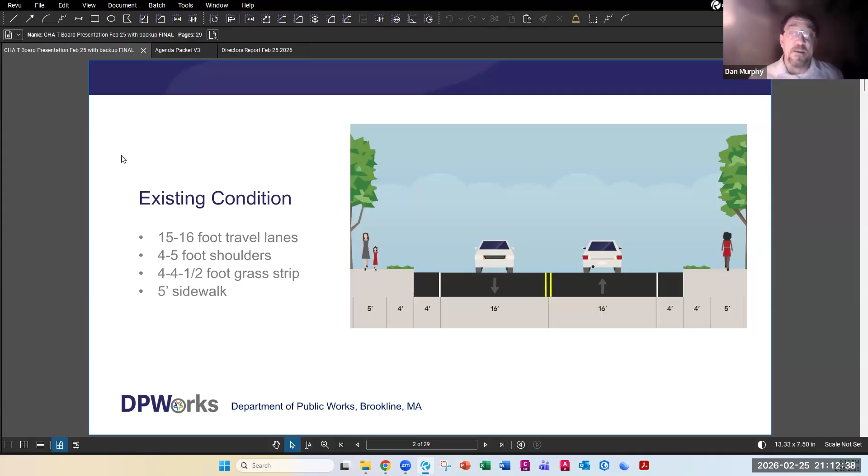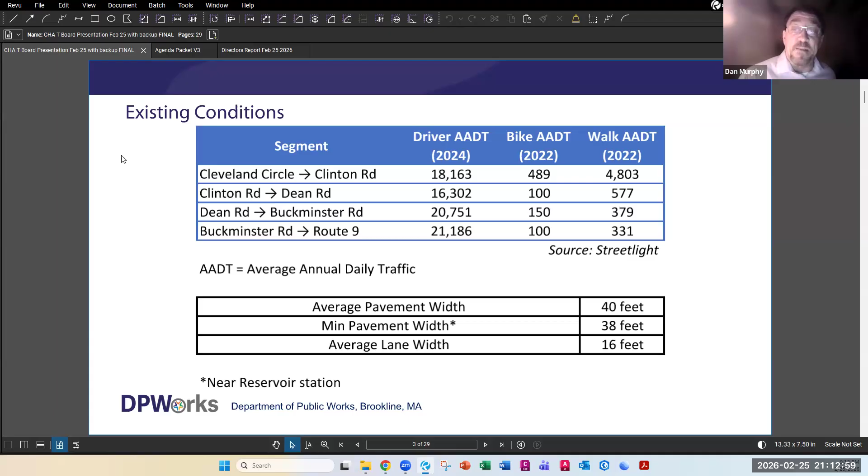Next slide. This gives daily trips for people, whether walking, biking, or driving. Chestnut Hill Ave is one of the busiest one-lane in each direction streets in Brookline for vehicular traffic. As you can see from streetlight data, walk and bike traffic is highest near the Reservoir station, as you'd expect, and the highest vehicular volume is nearest Route 9.

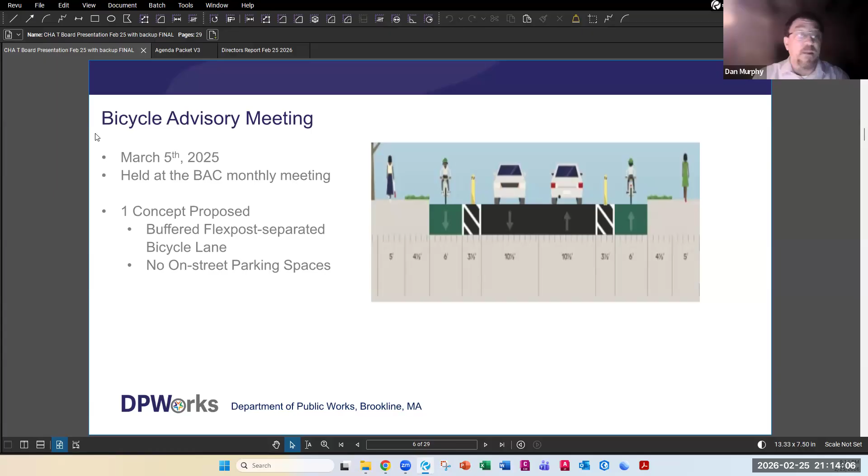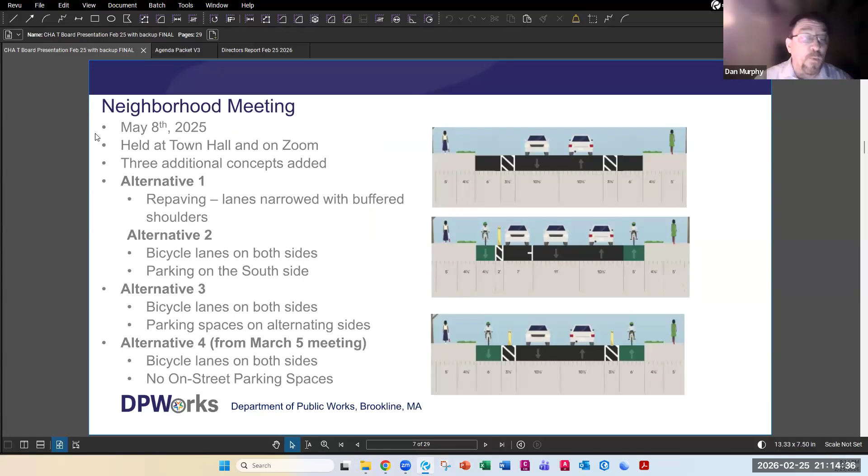Okay, next up. At the first meeting there was just one concept presented - bike protected lanes with flex posts - presented at the first BAC meeting where the neighborhood came. The second meeting was at Town Hall, and we added 3 other alternatives: a buffered shoulder option; one with one side flex-post protected and the other side just a lane adjacent to traffic, with parking on one side; and a third alternative with parking switching back and forth between the two sides. The fourth was the one initially presented.

All right, this was the second meeting, so again all 4 were presented to the BAC for feedback, and I know they provided written opinion back to the T-board.

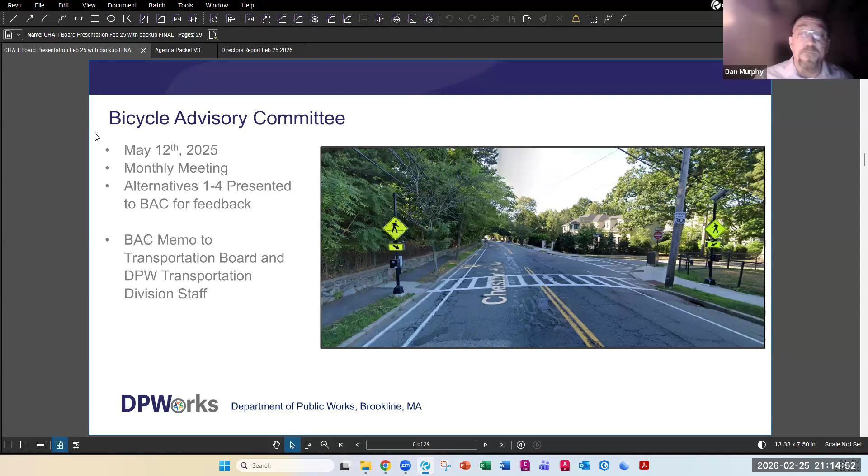Okay, so at the neighborhood meeting we added one more alternative, after talking to Peter Furth. He had an idea he'd seen in the Netherlands, where you could have the parking partly on the shoulder on the inside - that was another option presented, as Option E.

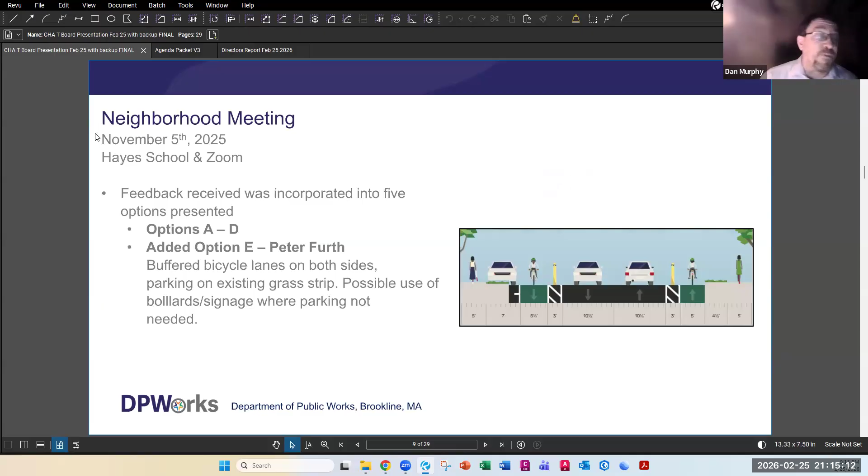Okay, next up, I did want to just share with you. I know we presented this at the neighborhood meeting at Hayes, and this just showed... let's see, make sure I get it here. This just showed that we did an abutter survey.

60 abutters were solicited, about a third responded. Most said there was medium curb parking use, and two-thirds said their driveway could not meet all of their parking needs. Although 63% said a family member owned a bike, more than three-quarters said they would not use Chestnut Hill Ave even if improved. That's just from the summary.

Okay, next, we did look at pedestrian improvements. As part of this, we did a first cut through, and this shows basically pedestrian improvements on the northern end, Reservoir Station, and Clinton Road.

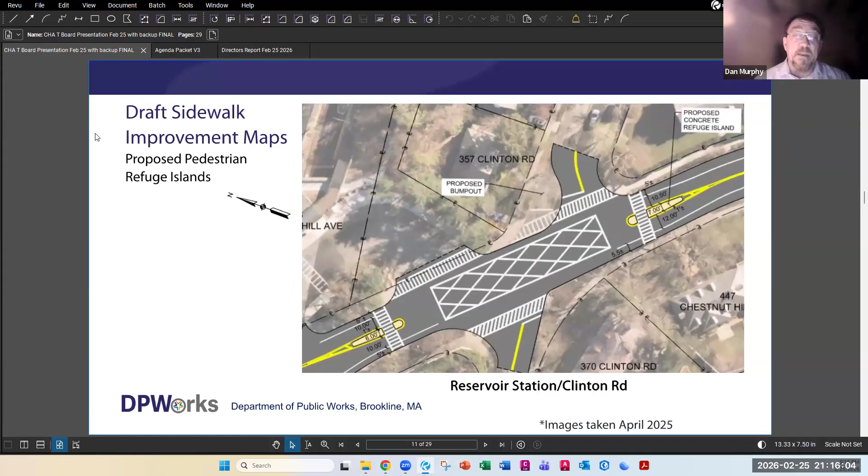The next slide, please. We had a couple of proposed pedestrian refuge islands near Buckminster and Hyslop. And then the next one, we had one at Ackers.

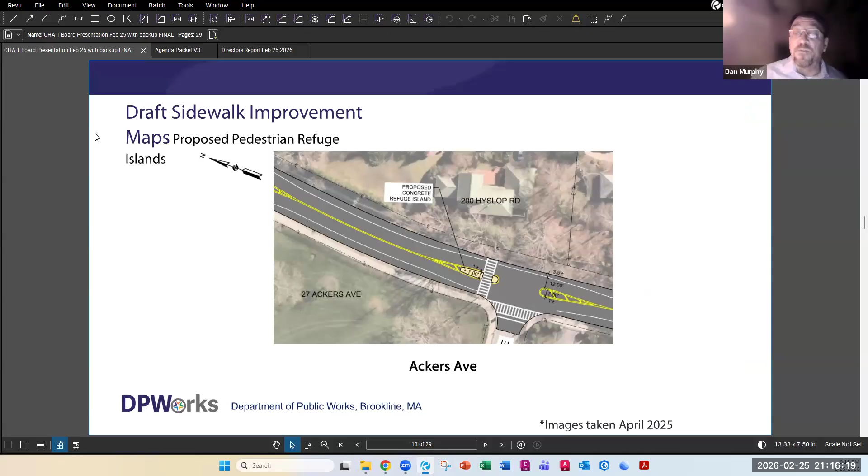But the Boston transition - we've been in touch with folks in Boston. There's some uncertainty about what their plan is. The T is looking to do some work on the tracks. They have looked at some future improvements, but they're really not committal on what they want to do yet. There's no real date set on that.

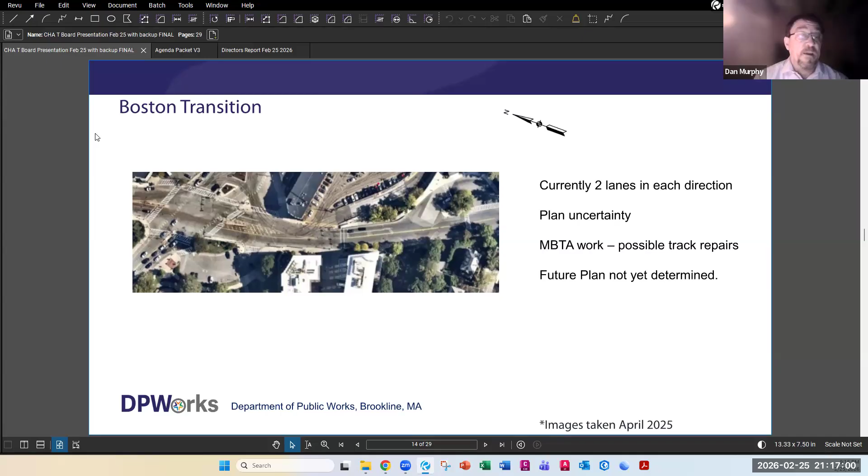We actually reached out just today and yesterday to get that confirmed. So right now there's two lanes going in and out of Boston, and as of right now that's the way it's going to stay for a little while. But we're waiting to talk to them in the future as we move forward.

The last thing I'll say is my first thought is that the lanes are really, really wide. So if we do anything, we've got to narrow the lanes. Buffers would definitely be a big improvement. Curious to hear all thoughts from what folks want to do.

Our spring 2026 paving is set. The first part of the year we could look at something for the fall, or maybe look at Chestnut Hill Ave as a 2027 project.

As you mentioned earlier, we did present an approach to setting priorities in a soon to be held meeting, and we can include this in our priorities discussion at an upcoming meeting. That's really everything I have in a nutshell, and just wanted to share this with the board to see if they had any thoughts. I know it's late, but thank you for your time.

What's the condition of the pavement out there now, Dan? I guess one thing I was looking at - it's really a mill and overlay type improvement, but we did do a bonded wearing course on a section of Beacon, which was similar. The westernmost section was close, but this is most likely a mill and overlay job.

Okay, and what was the genesis of this whole project? Well, it came up on our pavement management plan as one of the roads that needed work. So really it was part of that, and then we brought it forward and talked about it. I know it's in the Green Networks plan - this is one of the streets that's in there, so it kind of took on review in that regard. Okay, thank you.